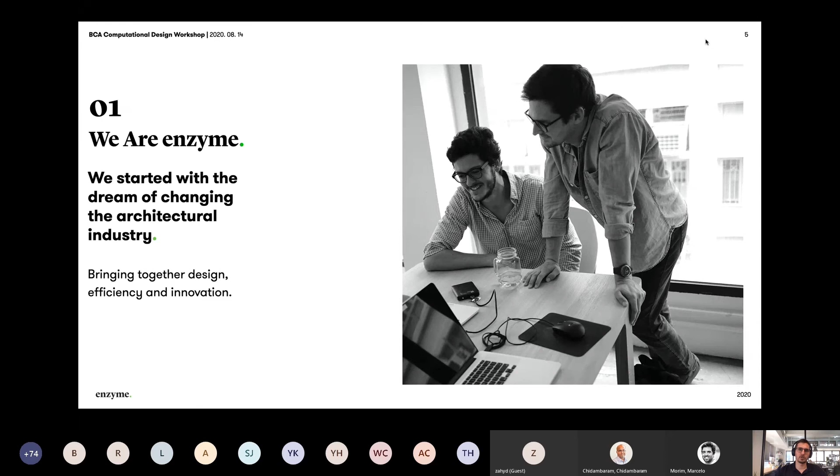So we wanted to bridge that gap. Within the company, we first focused on high-quality design, of course, but that's not enough — we've come to learn that it's not enough anymore. Many people are doing good design, so we have given ourselves the responsibility of improving and enhancing the way we work every time.

So every project becomes research, every project becomes a journey where we try to implement and expand the knowledge, the skill sets, and try to be more sustainable, not only for the environment, that's one of our key focus, but also economically sustainable, the projects for the clients and for us.

Because of that, we are all the time looking into new technologies, like BIM, computational design, real-time rendering, GIS. We keep on developing smart workflows, trying to integrate all these technologies.

So the team is actually quite small. We have offices in Hong Kong, which is the main office, and we have a small office in Madrid, because the three founders were from Madrid, and we have offices in Madrid and in Singapore as well.

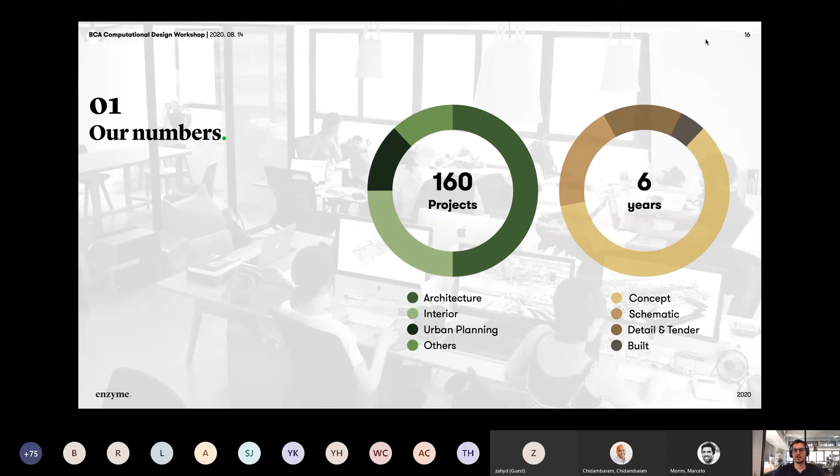So being so small and so young, we have participated and worked on more than 160 projects in the last 6 years, across various scales. So we're very proud of this.

So anyway, as I said, a few of the clients we've been working with, from developers in different parts of the world, Swire or Lotte in Asia, Emaar in the Middle East, Oliver Wyman as well. And then we have also participated and collaborated with a number of architectural and engineering firms like ADAS or Takenaka, Woods Bagot, KA in the US, PLA in Hong Kong, and Architect 61 in Singapore.

So just to move forward a little bit, I want to talk about two key things in this presentation before we start. One is the use of BIM to communicate our ideas. In terms of using BIM for design, I think this is one of the most powerful things we can do. Of course we can be efficient, we can be fast, we can be precise - that's a given, that's the BIM platform. But one of the best things about the use of BIM is to help us as designers communicate our designs and communicate ideas.

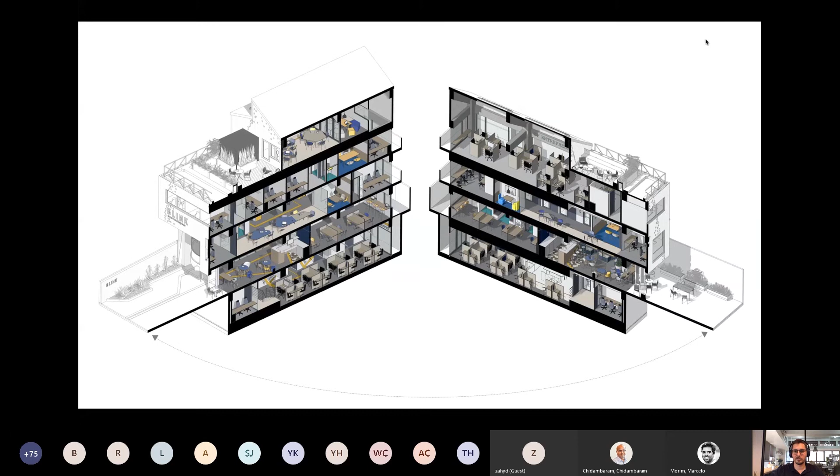Same as, for example, creating these sections - this was all created in Archicad. So 2 3D documents put together on a layout and just an arrow. So very fast and very, I think, at least for me, very visual, very impactful. Also when we're talking about just simple documentation, the fact that we're able to create these Photoshop-like drawings really helped us without having to go back and forth to many other software.

And lastly, in this part of the presentation, the Twinmotion and Unreal integration - I want to show you one of the latest projects we've been working on. It's a competition here in Asia somewhere, and we created this animation in a day with the Archicad model.

So this is all rendered in Twinmotion, is it? Exactly, this is Twinmotion. Twinmotion 2020 or the previous? This is 2020, this happened like 2 months ago. So it's not the latest version, but the previous one. It's the 2020.1, I believe. Oh, okay.

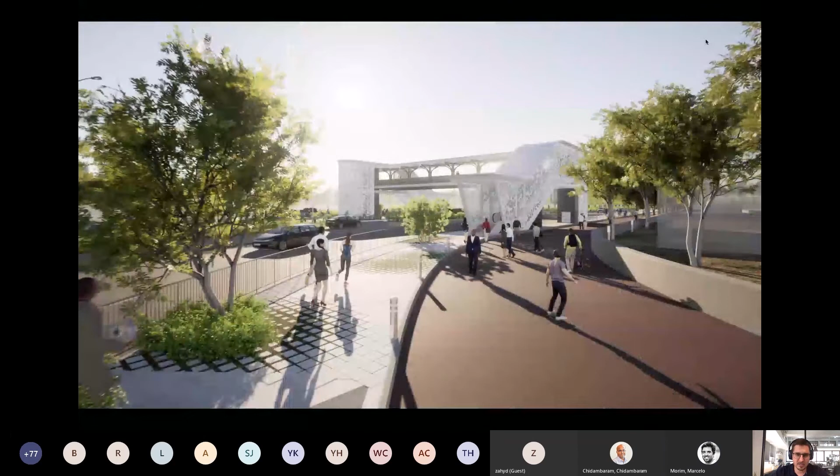That's quite impressive. And this whole project, the renders, the animation, everything was done within a week. I mean, it's not a big project, and everything was done internally in the office. So you didn't have to go hire a rendering expert? No, exactly.

So once the project was finished, after a few days, we just put it in Twinmotion and spent a day playing with materials and vegetation, etc. And one of our guys put it in Premiere to add the music and create a bit more of a professional look. But that's it. Okay, very good, well done.

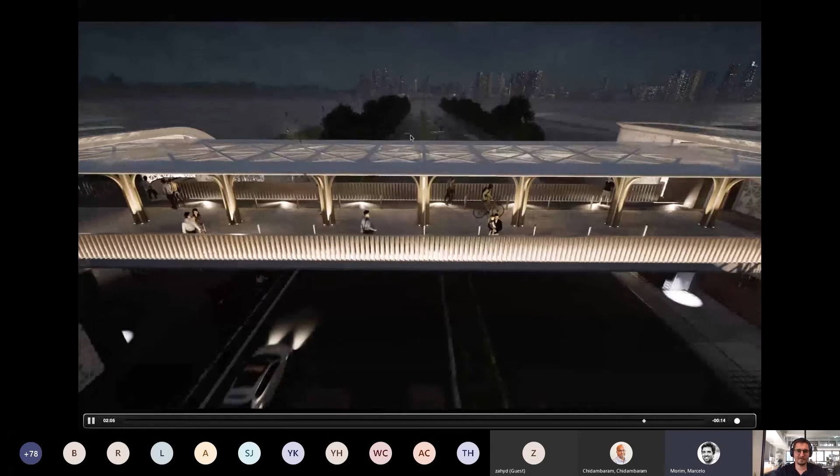I don't want to spend more time on this, but I believe this can be something really powerful for every practice. More and more, you can do the renderings yourself. I mean, we still use render companies, but only when we need very high professional quality, not for the everyday rendering jobs.

For every project we need to produce an average of 50 renders in total, because every time we're trying new designs or iterations, comments etc., people want to see how that looks. So if we have a tool that is almost free for us - free not in terms of buying the software, but free in terms that we spend very little time - then it's really worth it.

So anyway, moving into computational design, this is the second thing we love about Archicad and about the work we do. Lately there's this trend in architecture, I think for the last maybe 5 years, where we're bringing this concept of parametric thinking.

That means it also includes BIM, at least in my perspective. And this is changing the way architects, especially young architects, are designing and aligning their thinking process. It's very different from the old school way to do architecture, and I don't think one is better than the other.

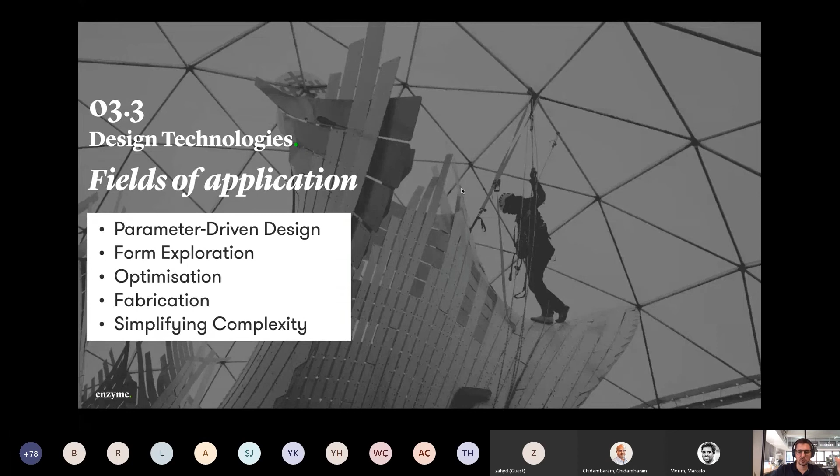Or you as a designer can decide which goals you want your design to reach, and then you can use tools like this one called Wallacei. It's an improved version of the Galapagos tool that Marcelo was showing before.

Those tools are based on evolutionary genetic algorithms, applying biological genetic theory into architecture. So practically they find the best solution in each iteration, or generation, and then combine those good solutions into a better solution, and then into the best solution.

So you can optimize for one parameter or for multiple parameters. This Wallacei tool is optimized for multi-variable solutions. It's something very interesting that we've been using lately as well.

So in terms of form exploration, something we really like about this live connection between Rhino, Grasshopper and Archicad is that you can continue. Obviously Rhino might be the best tool for this job because it has all the freedom of NURBS modeling. Now in the new Rhino version, you have subdivision modeling as well, which is really interesting. But things in Rhino, SketchUp, Blender or 3ds Max are just geometry.

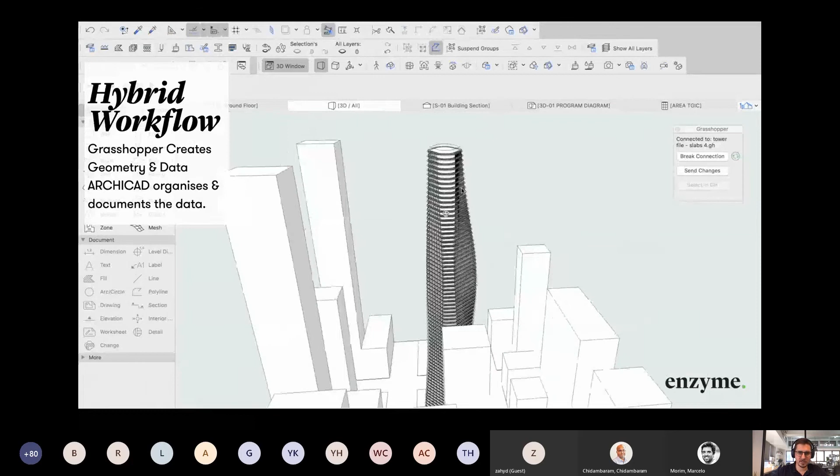Our typical workflow would start, for example, in Archicad or in Rhino, where we start playing around with very simple lines. These lines can later become, as you can see here, slabs, beams, balustrades, curtain walls, or whatever, but keeping it super simple.

Like if you notice, I'm going to just stop here. Oops, sorry, I don't know if I can stop the video, but these lines—we're playing around with an extremely light Rhino model. This line in Archicad, I like to call it double parametricity.

So the overall shape is parametric in Rhino Grasshopper, but those lines, once they enter Archicad, can be many things—walls, slabs, and beams almost at the same time—and they can also be parametric in Archicad in the sense that they can change the level of detail without changing anything.

In Archicad, they can start adding more and more detail, for example by changing a simple beam for a complex profile beam, etc. Then they can become something extremely detailed with very few lines actually modeled in Rhino Grasshopper.

In this process we use data-driven design. By creating a proper template for design, we can keep track of every iteration by using schedules, for example. We can insert properties from Rhino Grasshopper, and if we have this prepared on our template file, we can leverage the power of this information that is parametrically embedded from Rhino Grasshopper.

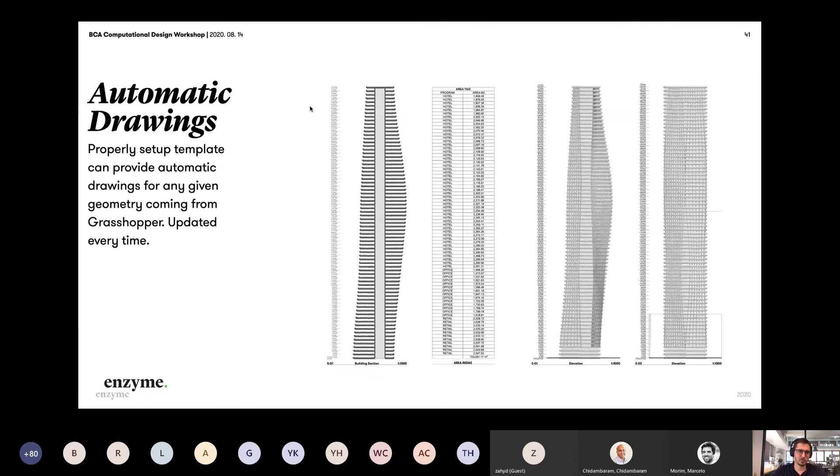And these 20 options, if the Archicad file is properly set, you can have almost like a concept design documentation package for each of these 20 options, and they are updated every time, all together. So this is really powerful for us.

Similar to, for example, 3D views, etc. This particular exercise you're seeing on screen was a model developed live in another webinar, and it happened within an hour and a half—from scratch, creating the Grasshopper model, to having this level of detail.

The most important thing is that this was not just one design, it was a family of designs. By changing the script, you could create any similar tower.

Another advantage is that by using this plugin with Rhino Grasshopper, you can bring even models developed in Archicad into Rhino Grasshopper and run analysis using Ladybug and Honeybee, or other plugins, to assess how different constructive solutions impact our design. So it's like a both-way channel.

In this case, we were trying to assess two things: an architectural language for a facade, and optimizing the number and size of sun shading devices, calculating shadows from other buildings and the sun path. This created a very particular and interesting facade language while also optimizing cost, construction, material, etc. So it's good for many things.

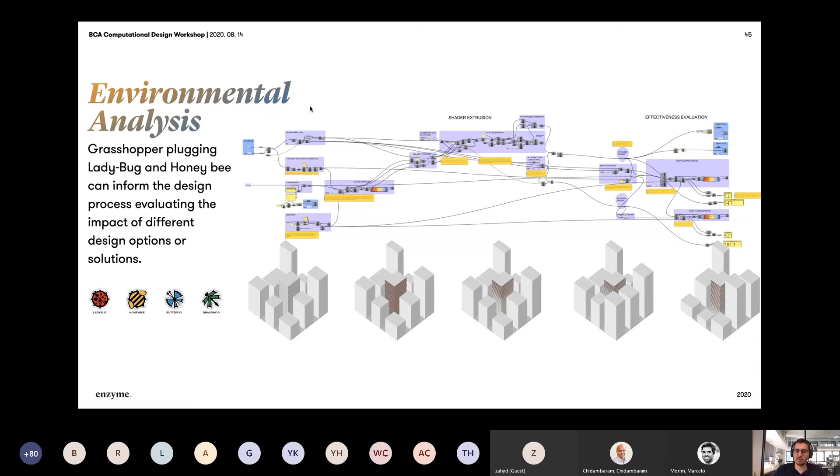I'm going to show you very quickly a few case studies. Some of them you already know, so I'll probably go a little bit fast.

This is one of the first projects we did using this connection, almost five years old. We wanted to create this fluid wave form in front of the coast, and this was very difficult to achieve in Archicad—so this is specifically when we started learning Rhino Grasshopper.

Our client was a hotel developer that had hardwired typologies of rooms with specific sizes and layouts they wanted to use. So we said no problem, just give us those layouts, and we hardcoded that into the script as our starting point.

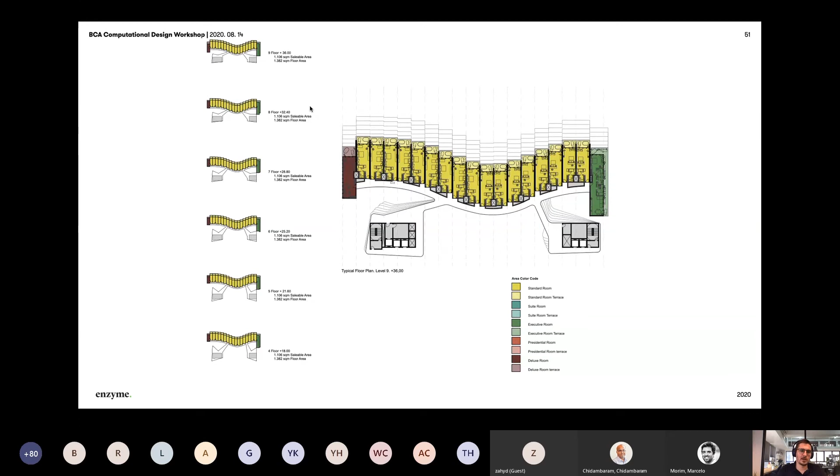By using and moving those modules, we created this interesting volume and facade. We also used Grasshopper to send everything to Archicad, where the documentation process happened—creating floor plan diagrams and area schedules for each of these options.

Then we worked on specific architectural features, like this facade using a rotated fin for the sun. You can see how there was a seamless connection from Rhino Grasshopper to Archicad—and in Archicad we don't have Rhino elements or imported or weird elements, we have proper columns and proper BIM elements.

This is a project in Malaysia, located in the middle of KL, in a beautiful jungle area near the communication tower. The terrain was very steep and quite difficult to work with.

The goal was to build a 500,000 square meter residential project, which would probably mean destroying most of the jungle and creating one of these typical typologies. So we wanted to create something different.

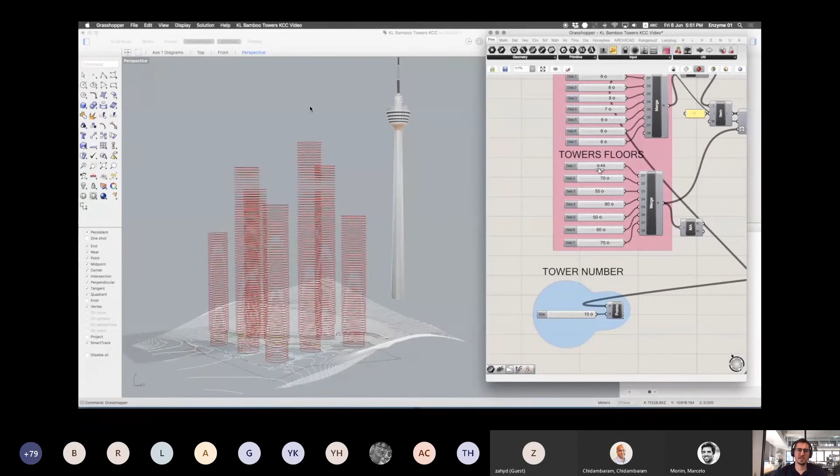We also used Grasshopper to assess different volumetric versions of the towers. The script eventually became quite large, but we ended up sending all the basic information to Archicad, where we continued development—you can see the Archicad screenshots here as well.

And in Archicad, we were able to leverage the power of this information coming from Grasshopper, creating these quick diagrams, tracking all these different types of floor plates, of rooms, apartments, etc. Then we developed a few hot link modules that then became the whole project.

As I said before, one of the best things about working with Archicad is that at any time in the project, we could just stop, create these marquee sections, and get out these beautiful 3D documents explaining areas that were not so easy to explain with floor plans and sections, especially in such a complex project. Again, very easy to explain to the clients.

And this is just the last piece of the presentation. Sorry, I'm running 5 minutes late already, but this sort of engages with the next part. It was very interesting, so yeah, okay.

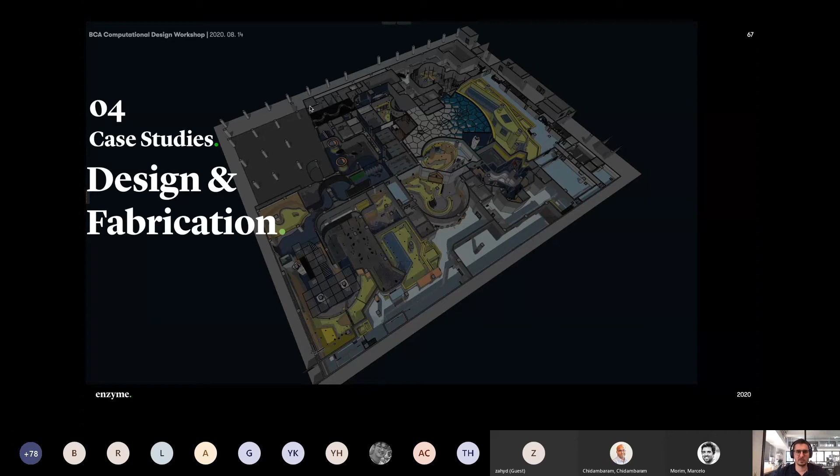The only good thing is that this part will engage with the exercise, so I think we have time. This is one of the latest projects we've been working on, quite a complex BIM model. I cannot reveal much about the project, but it's an aquarium.

So it has a lot of different components, from architectural or structural to very specific traits, like the aquarium specialists who have a lot of weight in the whole decision process. We're doing the architectural and interior design works for this project, as well as carrying the BIM model, acting as the hub where every other consultant plugs in their models, etc.

So in the interior design scope, we had to create a few design items that required this computational design approach. One of these items are the columns.

Because this aquarium is not a standalone building but is inside another building, we had the problem of having a lot of columns in the ground floor, lower ground floor of this building, all throughout the plan, and we couldn't avoid them. So sometimes they were quite annoying, and we decided that for certain parts where the columns were exposed, we wanted to make them disappear.

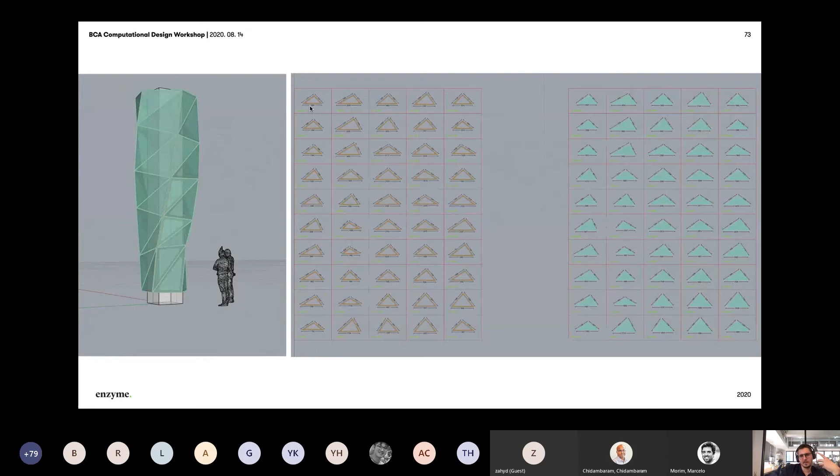So we designed this column - the main column came from Archicad. You can see here the wireframe model coming from Archicad. Then we designed the yellow part in Rhino Grasshopper, documented it in Rhino Grasshopper, and then sent the model back into Archicad for spatial coordination. You can see here Rhino Grasshopper and Archicad, where we placed all these schedules in the layout together with the rest of the package.

The columns were also important for creating all the internal elevations, etc. So this is one of the items, quite simple. In the same space, we had this very large area where there was nothing, and the client asked us to do something for that area that was in line with the rest of the space.

Being part of an ecosystem of rainforest, etc., we proposed this idea of having almost like this swarm of fireflies or butterflies that the client liked. By the way, this is the exercise that we will be replicating just after this.

So we went into Rhino Grasshopper because we had in mind what we wanted, but we had a number of items in the room, like the columns, and another condition was that the space was going from one floor down, because it's the same space. We were coming from an upper floor, and then suddenly the space dropped one more floor down, so it was like expanding.

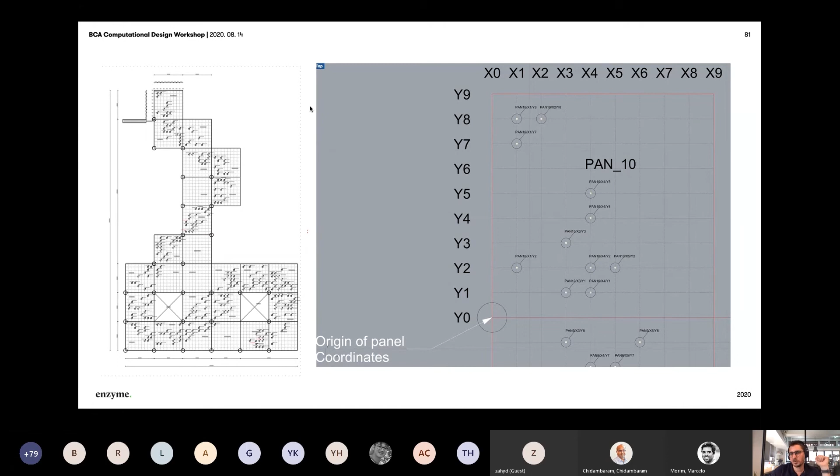Carlo is going to show us how to optimize that using Python and Archicad. This is how it looked, the detailed model in Archicad with all these grids as well. We needed to later create a schedule to have each of these lights and understand the length of each element, in which location, in which panel, and in which X and Y coordinate for each panel. So we created this schedule very quickly once all the information was coming from Grasshopper.

And you can see here a few images. I think I'm going to jump this one, so we can just jump right into the project. If you allow me, I'm going to quickly run through it, but I don't want to spend much time. This is another feature of the project, but this is quite complex, it was a complex area.

We decided to create this Voronoi ceiling, and we did a quite complex Voronoi script. This was successful for the design submission. You can see here some images of this idea, but for the design submission, we had this quite randomized. We didn't really think through the Voronoi, it's like a random system, something very natural, very fluid, very randomized. So we didn't think it through.

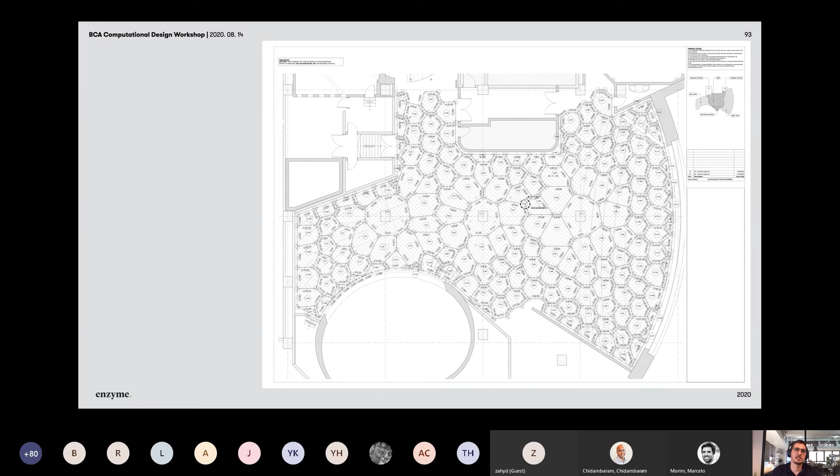I think, in my opinion at least, even the aesthetics of the final result, the final ceiling, have improved a lot. You can see here in detail what the first approach was, and then the final solved approach.

This is one of these images from this genetic algorithm tool called Wallacei. If you haven't looked at it, just go check the website they have. It's a free tool, so it's really incredible.

These are a few images of the process, and by the end of the submission we also played around with GDL, custom GDL objects that we placed in Rhino Grasshopper. The objects were created in Archicad, simple objects like circular plates, as well as the hangers, and we placed all these elements automatically from Grasshopper, choosing the length.

They were modular, so there were large hangers and smaller hangers, because all the panels have different heights. We were able to create different groups of heights to use these different modules and then place them automatically into Archicad. Once in Archicad, we were able to create schedules and know exactly how many of each of these elements were used. So anyway, thank you so much.

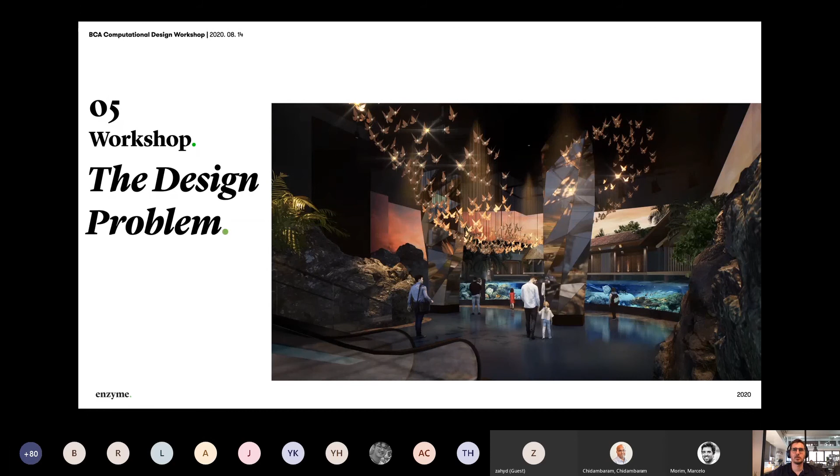Okay, so I just want to introduce you to the design problem. You can see on the screen one of the images of the space as it was designed. We started with these very sketchy ideas and references that the client loved, and obviously this is something that is quite difficult to do in Archicad.

At the moment of the concept design phase, we had developed the model in Archicad, so you can see on the right side of the screen this sketch render showing all these butterflies. That was coming from an Archicad model, very simple. Obviously the butterflies were a Photoshop added effect, something quick like a sketch to express the idea. The client fell in love with this, and that was the direction for development.

We obviously had to find a way to create, and not only create but also control, because this is an item that's going to be built and fabricated. So we needed to be very conscious about the number of items, the construction system, etc.

This is the space. You can see the space is coming down from an upper floor to this kind of two-story or double height lobby, and we have those columns there in the middle. So what we wanted to do is create this path.

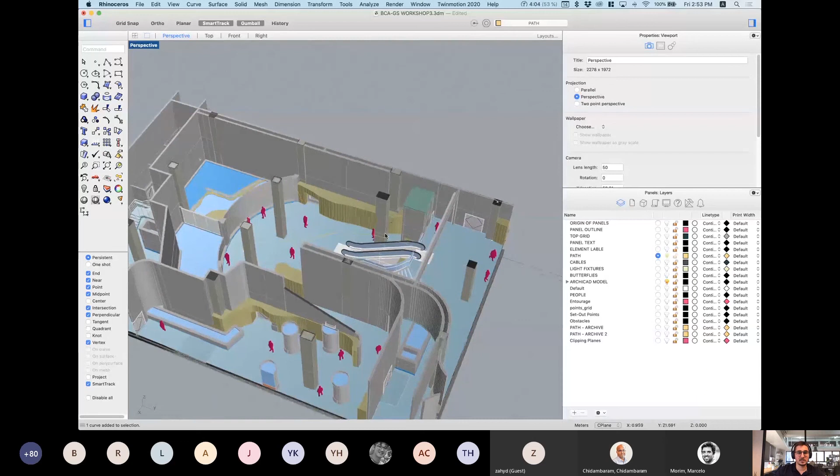So let me jump into Rhino and start with the Rhino screen. This is the Archicad Rhino model, the piece of model that was saved from Archicad. You can see it's coming in as a block, but we can explode it if we need to. I'm not going to, because I don't need to modify the model, but it's quite detailed and quite clean. If there's any Rhino user in the webinar, you'll see that the geometries exported are very clean.

So having this model as the environment, the only thing we did is create this 3D path. How to do it? It was quite simple, but let me repeat it.

We use this command here, the NURBS curve. By using it on the plan, what I did is just add control points, and we can create a different curve.

Then with this curve, we can go into the perspective mode. For now, you can see this is placed in the XY plane. The only thing you need to do is locate it into the right plane and start playing around with the control points, moving them up and down as you need.

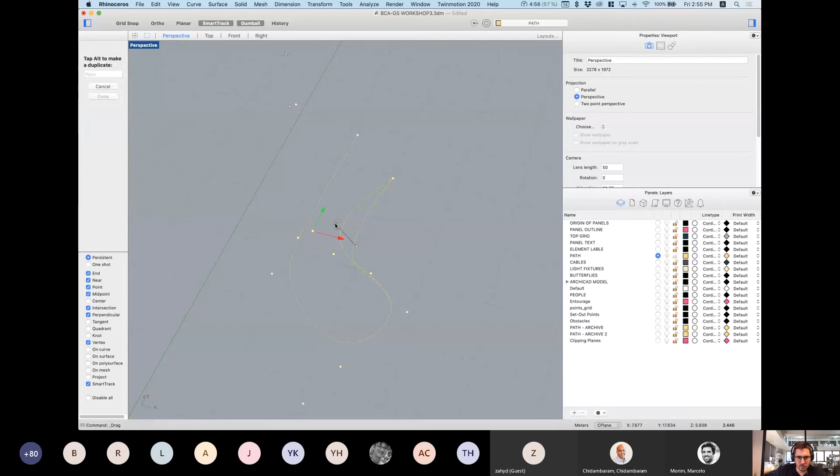This is the way I created this path. Let's hide this for now, and you'll see how easy it is to edit these points. We can play around, and if we don't want certain points, we can delete some of them to create a more natural curvature. It's very easy in Rhino to play with this element.

Once we have this in Rhino, we can compare it to the model and understand how we're doing in terms of height. For example, we can see here that we are inside the curve.

We can use this little tool, the gumball. You can move the arrows to move in X, Y, or Z, and also use these little planes here that will move in the XY plane, or if we rotate a bit, also in the X, Y, or Z plane.

Okay, so Jorge, this will help. Just a quick one - could you make the line another color? It's really hard to see. No problem, no problem, no problem.

Let me go to the path line and do it right, and I'm going to just get these other elements out. Okay, so I think now it should be easier to see.

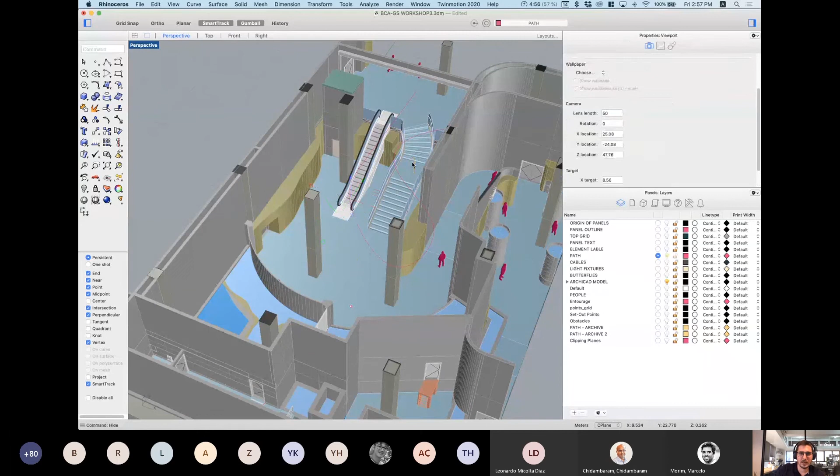Not really sure how to make it better. I have to say I'm not a very good Rhino user, so if there are Rhino users in the room, please don't laugh, because I'm only an amateur. I'm not sure if you can see better now - perhaps I can use the Arctic view.

Okay, so you can see now how the line is doing. As I said, we can refine the design of this line.

Once we have this, let me go back to the wireframe because that can be quite heavy. I'll get this panel out and open Grasshopper - just type Grasshopper here in the command bar. This is the script that I developed for the exercise.

I've simplified it quite a bit for this exercise, so most of the things related to fabrication have been deleted just for clarity. But we will explain those processes in a later webinar.

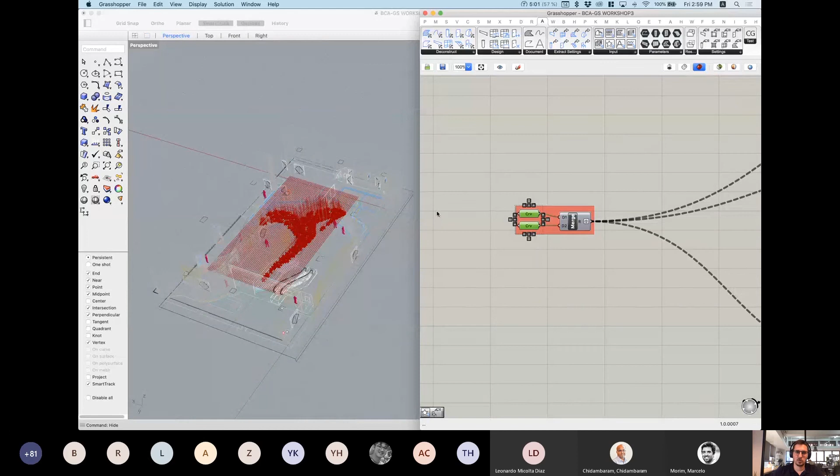So the script starts with the input of the lines. Let me hide this, and we can use it later. We have these two curves in here. I'm using a mode in Rhino Grasshopper that can hide - this one will show all the geometry we've created in Grasshopper. If we click this button, it will only show whatever is selected, which is very useful for debugging or to show only certain parts.

So we started with these two lines. This will create the path that we want the lines to follow, and I'm merging them together in order to have just a group of these two lines to work together.

You can see that the script goes in three different directions. The first one is this one here.

I am dividing the curves at a 1.5 distance, and I'm doing that because I want to find the perpendicular vector, the normal vector to the curve. Why this? Because what I want to do, let me explain it quickly here, I want to create an offset to these curves.

An offset, but I want this offset to be natural. I don't want it to be a strict, perfect 0.5 offset. I want this offset to be a little bit fluid.

So what I'm doing is finding this vector that is perpendicular to the curves by using this frame, the horizontal frames. That is giving us, you can see, a bunch of planes at each of these points.

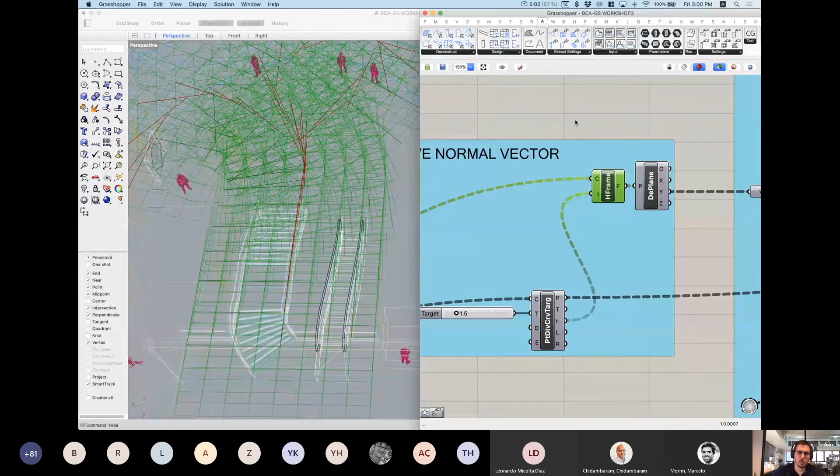Wherever there is a point, it's creating a frame that is in the XY plane. This frame is aligned to the curve. So what I'm doing with these frames, let me just get one of these frames to see it.

This frame has these two vectors, right? A frame is a plane, it's just another way to call a plane. So we have the X and we have the Y vector.

And this Y vector happens to be the direction that I want to use. You can see that this Y vector is perpendicular to both curves, because I have two curves, I have two planes, right? So what I'm doing is using that vector.

So I want to find that vector. In order to do that, I have to take these planes and deconstruct them. So you can just type deconstruct plane.

And I'm using this technique, which is just double clicking on the canvas and typing. So, deconstruct plane. By the way, if you don't know the name of the specific node that you need, you can just find them in the bar on top, it's quite straightforward.

So you have vectors, in this vector tab here you have everything that is related to vectors, so planes and grids and vectors itself, curves for everything related to curves, surfaces. So it's quite straightforward.

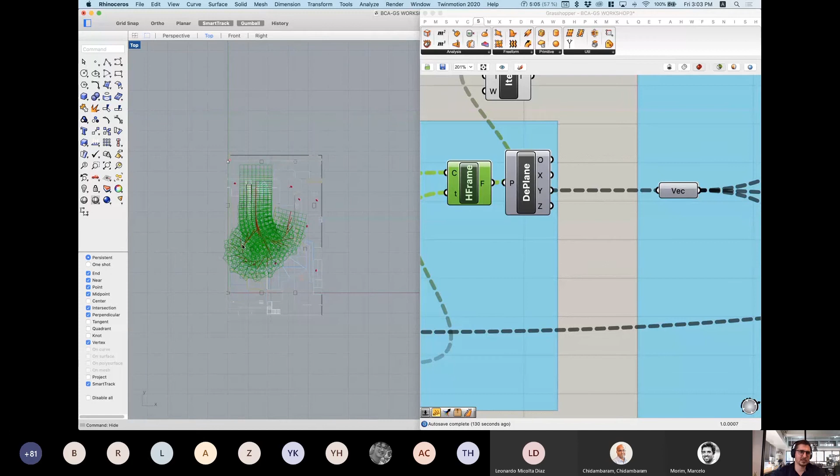It's very simple. If you go to the top view, you can see this little icon here on the bottom where you have Y and X, and then you have these two colors, green and red. Red is X and green is Y. So that's how I figured out which one I need.

So I took the Y and I just put it into a vector node, an empty parameter vector, just to keep it here. So this whole piece of code here looks very complicated, but actually it's not so complicated.

It's just a repetition of this module here several times. Actually, this one here. So what I'm doing with this, I'm taking this vector here, and I'm using this function that is called the graph mapper.

What the graph mapper is going to do is create a series of numbers from one number to the next, and it's going to create a series of numbers within that range. Let me explain with a practical example.

So I want to move, let me show you this. Let me show you this curve here, and let me show you the original curve. So, let's go to the top. What I want to do, I'm going to just delete this curve here, and we're going to play with only one curve. It's quite more comprehensive.

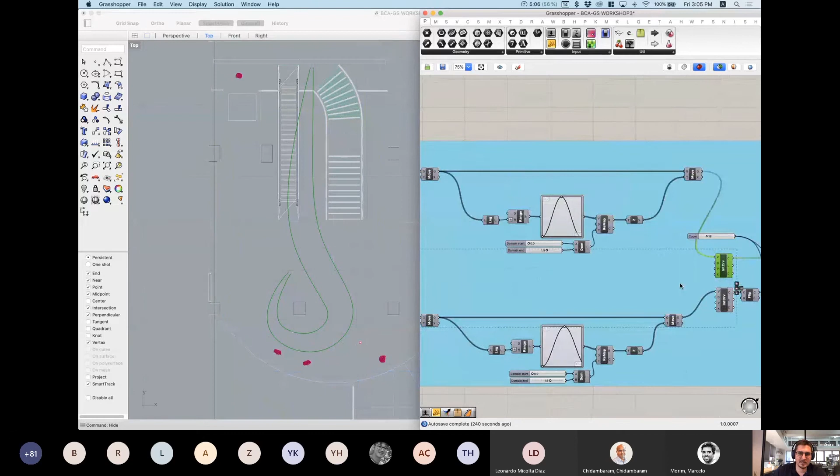So you see that I am moving all these points, all the points that I had before in my curve. I'm moving them by a number, creating this offset that is not constant, but it has this shape. So what I'm moving these points from is 0.2, so the minimum here is 0.2, and the maximum is 3 meters.

So this is 0.2, and this is 3 meters here. This represents the length of the curve in this direction. And what I'm doing is dividing this edge here by the number of vectors that I have, so I have 22 values. What I'm doing with this is called list length, which gives me the number of elements in a list, 22.

So I'm creating a range that is from 0 to 1, but divided by 21. I'm doing a little subtraction here using this expression editor, just subtracting one value. Why is that? Because if I want to have 22 numbers, I need to divide by 21 divisions, since I'll have the first and the last plus the 21 divisions. That will give me 22. So I'm creating this range.

So this is the length of the curve, and these are these values, 0.2 and 3. Actually it's 0 to 1, but I'm remapping the values into a new domain that is this height. This gives me just a bunch of numbers.

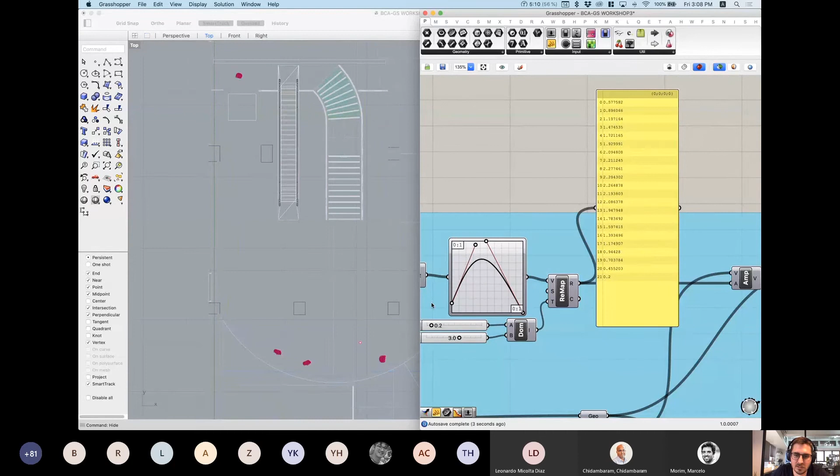Okay, this is one of the most difficult parts, guys, bear with me. Once we have these numbers, what I'm using them for is to create a vector. This is called amplitude. It will take any given vector and give that vector a value of amplitude. This is exactly what I need, because what I need is to have these vectors that are going to move my points.

They need to have specifically this proportion. So I'm taking the vector that I calculated first. If you remember, this y vector, when you see these vec parameters, I'm just using these empty parameters to organize the script, moving the same information from one to the other.

So I'm taking this vector and applying to it a value of amplitude. So these vectors now have a module equal to this number, and I'm moving these points specifically to that distance. You can see that.

So after moving these points, I'm also applying a movement in the y direction, and now I'm applying a movement that's exactly parallel in terms of height, but it has this almost sinuous movement. In terms of height though, it's exactly the same heights. What I want to do is move it as well in the z value.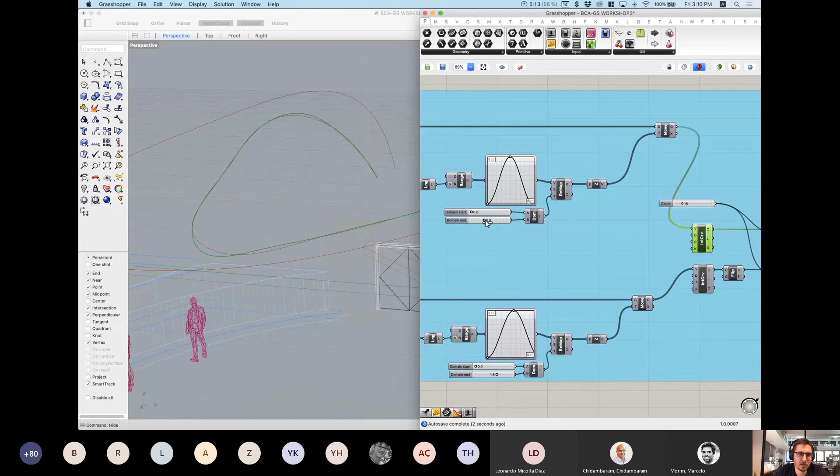So now it won't be any more similar in height as the other, but I'm also deforming the height of this.

Okay, I don't want to go too crazy because this might later on affect things, but this is the idea. I'm doing this not only on one side, but on both sides. So I'm taking the points, moving them here, then moving them up and down, and then taking the same points, moving them to the other direction, and moving them up and down.

So this one here moves the point in one direction, this one here in the other direction. You can see it here, on both sides, and then these guys are going up and down. So it's very simple, just very repetitive. It looks quite complex, but it's very simple.

Once I have the two curves, I just join them to get lines created on both ends. How did I do that? I just use a component called endpoints that gives me these points on the end, then just connect them with a line, and join them together.

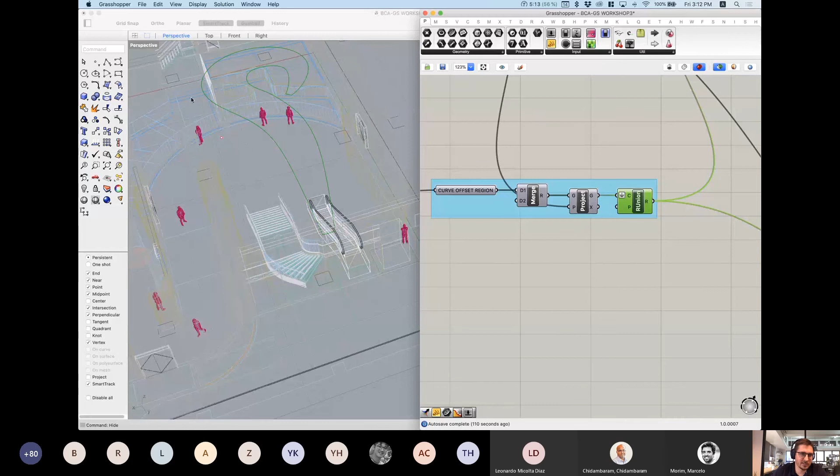Not anymore. So I have the area that I want to create the scatter of points. This area obviously depends on my line.

If I go and show the line, the original line, I'm going to just show selected. I just want to select this line here. If I move this line now, everything should adapt accordingly. So if I move the original line a little bit, I'm not sure if it's visible enough, but the script should... let me just set one curve. This one here, okay. You see now, it was not connected, but if I move the line, the script will create this accordingly. So everything now is connected to that original line.

Cool, so this is like the first part of the script. We're halfway through. The second part that I'm going to start is to create a grid. Why do I want to create a grid?

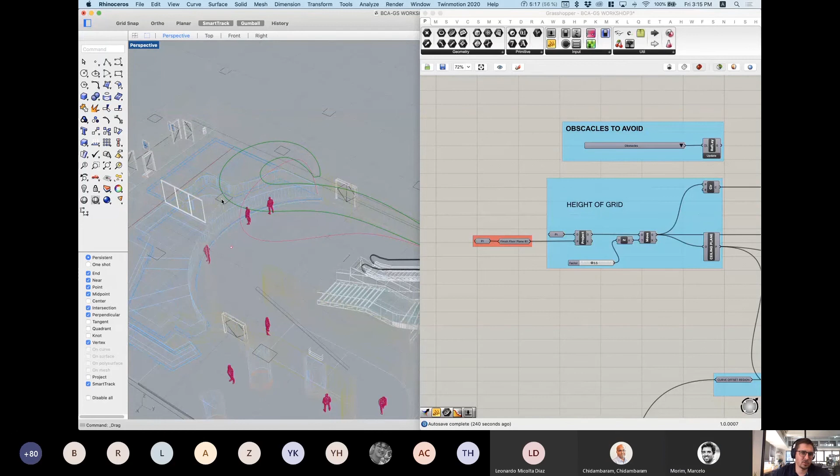So, in order to create the grid, you will see some elements here that actually I'm not using anymore because they were important for the fabrication part. But don't worry, I will explain this in the next webinar.

Okay, so we're going to start with this point. This point is giving me, you can see it here, the height of the floor finish of this element. I could also have brought this from Archicad. I didn't do it that way, but we could have as well brought the story from Archicad.

I'm going to use story plane. Story plane will give you the story settings, so it will give you a plane.

So let's cross fingers and connect Archicad. Bear with me if something goes wrong, because streaming all this just makes the connection a little bit more unstable. Yeah, it uses a lot of the graphics card. Yeah, so I'm going to try.

So what I'm going to do now is read the Archicad story planes. I could say, okay, I just want to have my B1 - that's the name of the story - and that's what's giving me. I'm going to connect this into a plane.

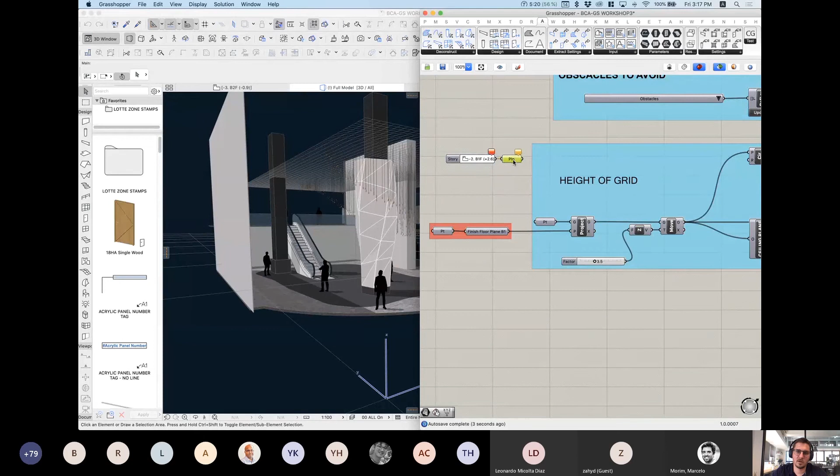Okay, I'm gonna show you in a different way, but the idea is that this will give you a plane. This plane we can just use for now, it's not connected anymore, but you see now it works well. This plane will be similar to this other workflow that I use.

So the workflow I use is to find a point here, and you project this point into... this point here, excuse me, is my set out point, okay? So what I'm doing is moving that point into the right location.

You can see here, so this will be the plane where all my ceiling will be, and it's 3.5 meters from this finished floor plane B1. I can control this parametrically as well. I had it at 3.5 for a reason, actually to avoid the MEP, but if we need to move it, I can move it from here.

And I'm just creating a circle there so I can see it better. And from this point here, I want to create a grid of 1.5 meters, so I'm creating this grid here.

This grid is based on, okay, so I have this region here, and this point, both points are giving me this region, this box. It's called a bounding box.

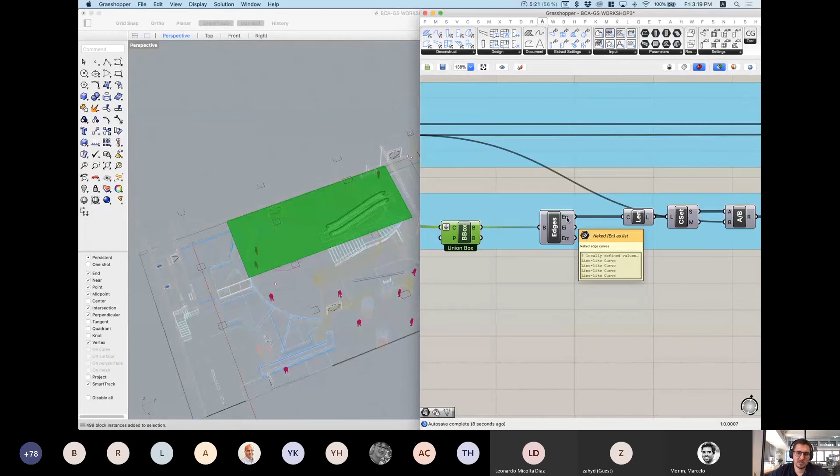And what I'm doing now is measuring these two sides of the box. So I want to know what is the length of these two sides. I'm connecting this to an edge component, Brep edge, and that gives me the naked edges. Naked means the external edges, edges that are not connected to anything else. In this case I have 4, so these 4.

I'm taking these 4 lines and measuring the length, using this component called length, which will measure the length of a curve. So I have these 4 values here. You can see if I add a panel here, you will see these 4 values.

But actually, and it makes sense, they are the same 2 to 2. So these 2 are the same, these 2 are the same. So I only need 2.

So I'm connecting this component called set, create set, and this create set component is very interesting. It scans through the list of numbers and gives you the elements that are unique. It gives you the elements that are unique on a list and the location of these elements, you can see here.

So it's telling you there is one element that the component calls 0, that is 8.7, and you see that 0 is located in these 2 points, here and here. And the other component, 1, is in this position. If we had 3 that are the same, we would have 0, 0, 1, 2, etc.

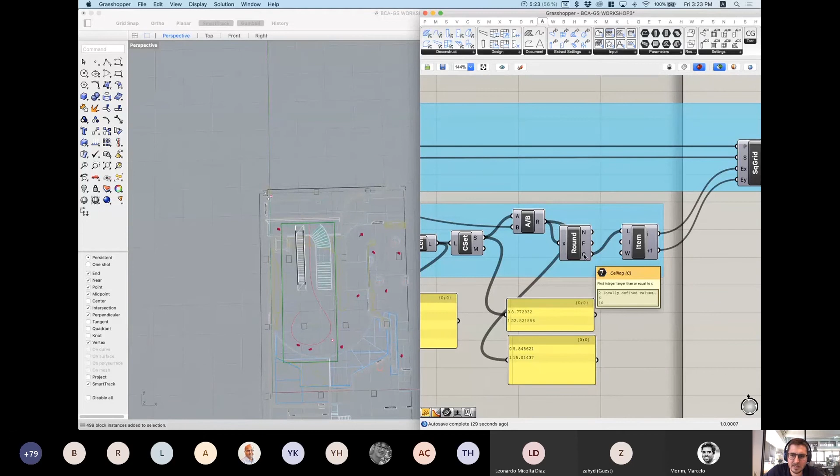One is 16 and the other one is 6. So I'm gonna have 6 panels of 1.5 and 16 panels of 1.5, okay? This is my grid, this is my module, okay? This will be important later on for fabrication, okay?

What I'm doing now here is taking this grid. This grid is giving me a lot of squares, okay? It's giving me exactly 96 squares. I don't want, at this point, all these squares. I just want to make sure that this is modular. So I'm joining together the box, and I am subdividing this surface, okay?

Subdividing by a number. So 49 and 99. Why is this? Because I want to have 100 points by 50 points, okay? So I'm dividing by one less, similar to what we did before, okay?

I could have related this as well to the module, but this was way faster, and I can also control this with a slider if I want. So I can create a slider from 0 to 100 and then go to 99 and connect. So this will also work, okay?

You can see how if I go lower, then you will see less and less division. So this could be parametric as well, okay? At the moment, because I know I don't want to move it, I'm gonna just keep it with a panel, okay? So now I have all my points here.

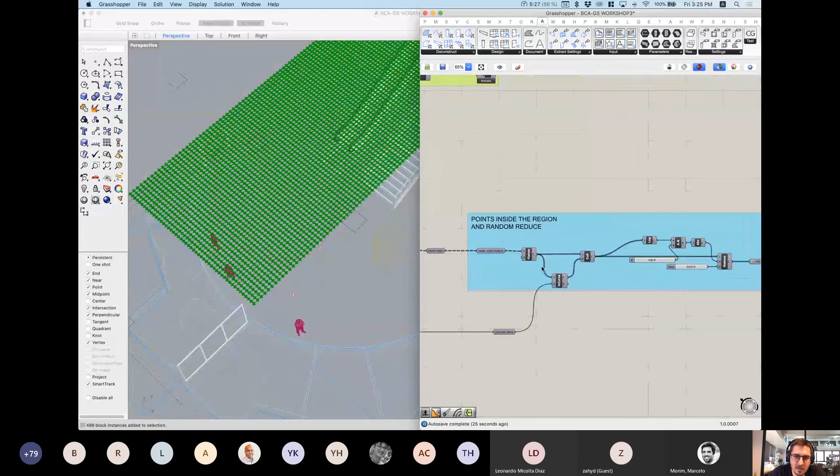They are all together. There are a bunch of points, and what I need to do, I need to do two things with these points, okay? The first thing I need to do is I need to use them to find the ones that are inside my area. This is the first thing. So this is why this is branching out, okay?

The other thing that I need to do, and this will be very important for Carlo later, I need to create a grid, okay? I need this grid of lines. And this is gonna be important later on for labeling and to create an ID system, okay? So how I do this is very simple.

I have this subdivision here of points, and this is giving me 5,000 points divided in 100 values, okay? I don't understand that very well, but I can use this component called point list, okay? And this point list, what it's giving me is, let me make this number larger so you can see.

Oops, too large. 1 perhaps, too much, 0.5 maybe, 0.3. Sorry, because this is the size of the number, okay? So you can see it's even too large, but you can see what is the division.

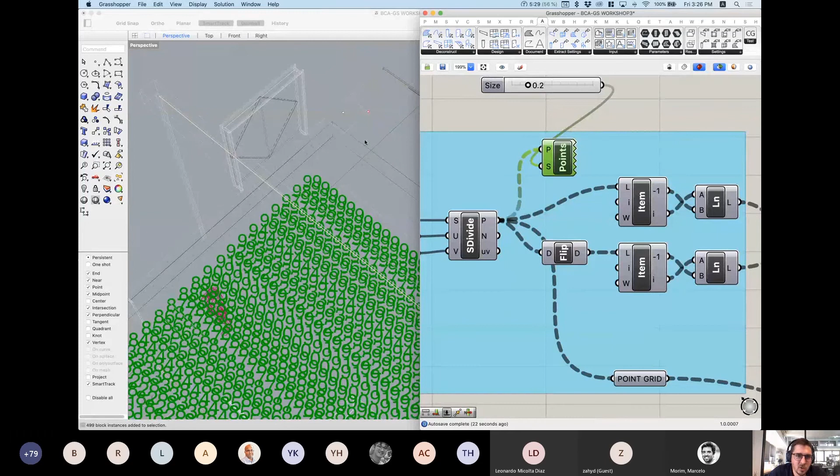So you see that all these numbers here go from 0 to, if I go to the other side, they will be 99, okay? From 0 to 99, those are 100 points, okay? Because 0 counts as well. So what I'm learning about this is that this component is grouping the points in these lines here, right?

In these vertical lines, okay? So something that I have learned is that if I take the first and the last point of these lines, I'm going to be able to create a single line, okay? And this is what I did here.

I am selecting using this component that is called list item, okay? You can just type list item. This list item will take any list, okay? And by default, it has a hardscripted number 0. So by default, it's gonna take the first element in a list, okay?

In this case, we have several lists. We have 50 lists. So each of these lines is considered a list, okay? If I look here at the information, we can see that we have 50, okay? You see like all the groups go from the top to the bottom, from 0 to 49. Each of the lists have a number of 100 elements. So each of these guys are one list.

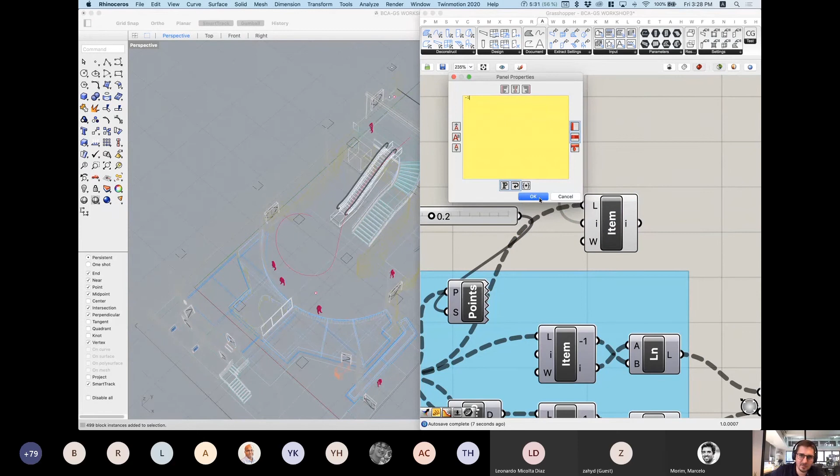So by taking this item and having here the number 0, okay, I have a panel and I just type 0. By having 0, this will be the item that I choose. If I have -1, okay, and this is tricky, but it's a notation that repeats everywhere in Grasshopper, -1 will refer to the last item.

So imagine this list to be a circle. If you start from the beginning, you will be 1, 2, 3, 4, 5 until 100. But if you start from the opposite direction, your last item will be the -1.

Okay, so this is the notation that we use in list management and list operations. If I type here -1 and also 0, nothing happens, because I need to make this a multi-line data, otherwise it doesn't know there are more than one element. So now I have 2, and this component is able to select both of them at the same time.

Also, alternatively, I can do one more thing. Let me just keep that there. What I can do is disconnect this from here, go here, disconnect. What I can do is keep the 0 here.

And if I go closer, I will find this element. If I click in here, it will add 1 in that direction. So I have the element that I want, that at this point is the first one, and +1. Now I have the first and the second.

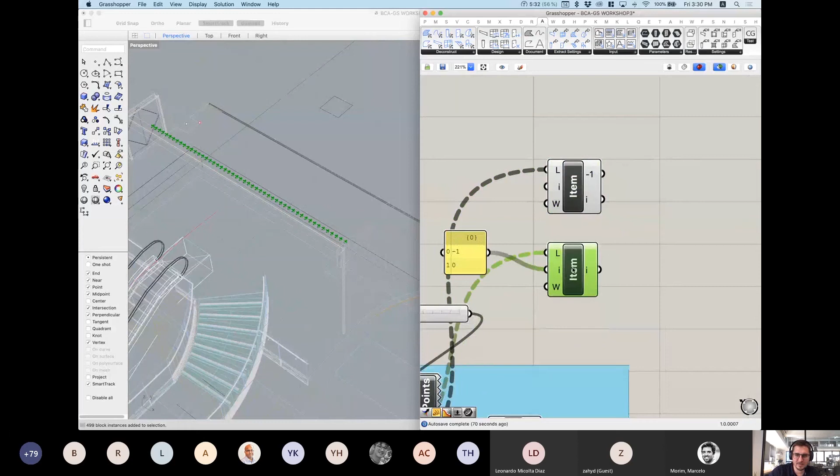Okay, and this is what I have here. Let me just disable these components. So by having these elements, I can just do a line. This is a component called line. I just type line here, and it will ask me for a start point and an end point.

So this is what I'm doing. Starting point is the 0, just to keep some consistency as well. So 0 goes to A, -1 goes to B, and I have all these grids here. I need to do the other one, and this is just one step more.

So what I need to do here, I have these 50 groups of 100 elements. This in algebra is called a matrix, like the movie, the Matrix. So this matrix of elements, you have to imagine them as in a grid, like a square grid, where you can divide these.

Just like a very simple matrix will be this one. This will be 2 groups of 3, or three groups of 2, depending on how you're looking at this matrix.

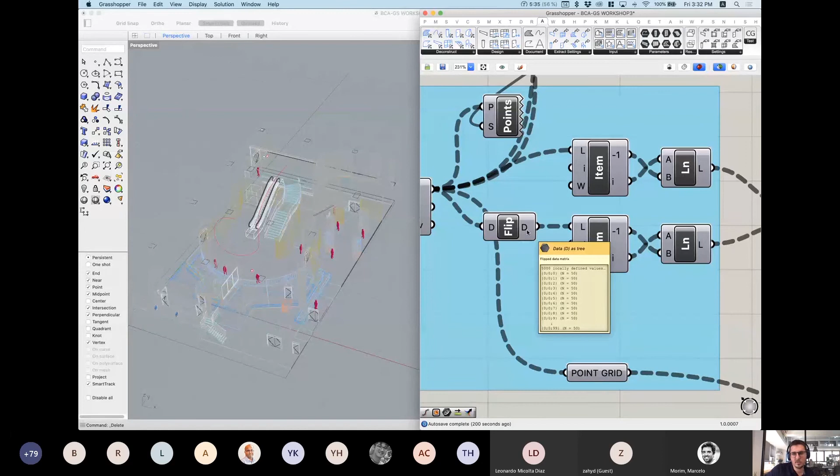So the operation we are using on this matrix is flipping. By flipping this matrix, what I'm doing is taking all the columns, and the columns will become the rows and vice versa. So by using this flip matrix, you can just type flip and find this flip matrix, and this one will rotate the structure of the information, and it will give you 100 groups of 50 elements. And that is exactly what we need.

Because if I do the same thing, I choose the first and the last, I will see that that's happening in the other direction. I do exactly the same, right? And I'm just merging these two using this merge component. So I have both the vertical and the horizontal in the same group.

And this is, I'm just sending this to Archicad, okay. And this is the simplest thing. I'm sending this as a morph, okay. I will do all the sending later on. But just to explain a little bit the setting, I'm using the morph.

I'm using the morph curve, not the morph solid. And I'm just attaching to the morph the curves in 3D. And I'm using the morph setting material that you can find here, in the morph settings, this one here. And what I'm doing is just adding a building material and a layer.

As Marcelo explained before, you could also create a favorite for these morphs and just attach the favorite, which would be very convenient because it's only one component.

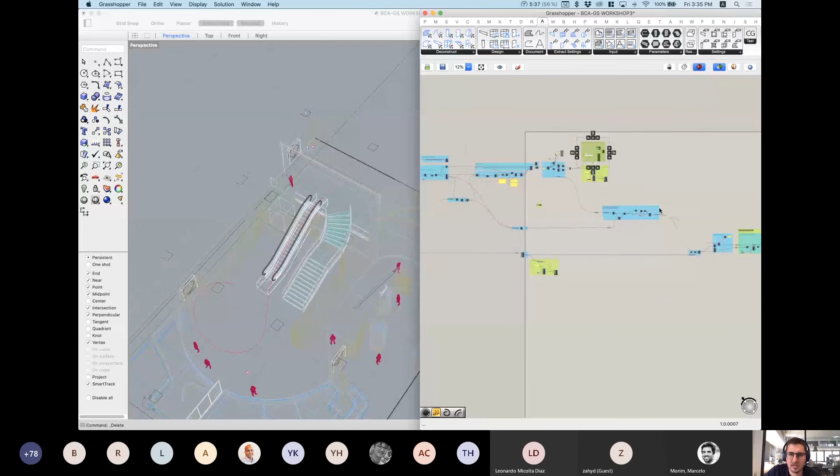All this part here, okay, this is the Elefront baking system. This is very similar to what Archicad does, if you look at it, it actually looks very similar. What it does is it just bakes this information into Rhino with some properties, so you can add a name, you can add some information. I'm not using any information, but I'm just creating a new layer, adding a color. So it's actually very, very similar to how Archicad works.

And what this does is I can have the latest, the most updated geometry in Rhino as well. And if I want, I can add some user attribute information here. I'll explain this in the fabrication part, because it's very, very important there. But for now, for the design part, it's not so important. I just have it here because at any point when I do any modification, I like to have it. I just click on activate, and that will overwrite the old geometry, so it changes the geometry in Rhino as well. So it's similar to what Archicad does, okay?

Anyway, so we can check as well in Rhino. I can just get the top grid and show it, okay? You see? Actually, it seems that I have two sets of grids.

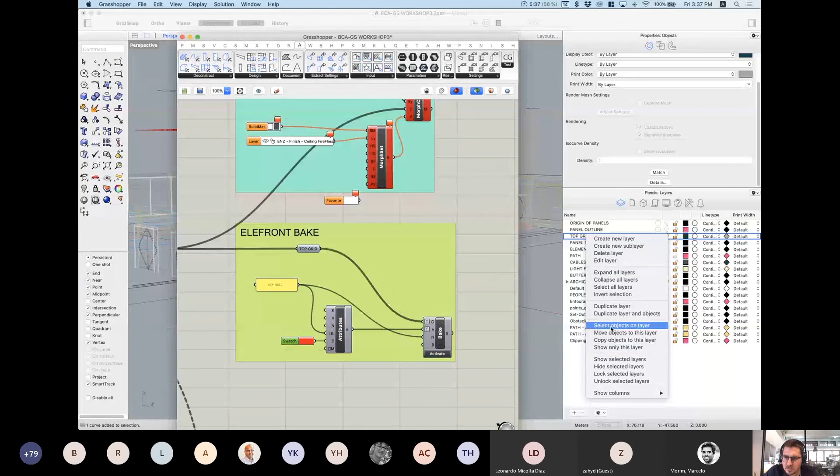So let me just come here for 1 second. Just select everything in the layer, delete those elements. Okay, delete those elements, and I can just simply come here, activate again, and now I have it. I think I deleted the swatch button, so you can just color your elements if you want as well, so I'm just going to bring a color. This is similar to the building material thing, if you like, but for Rhino. And now you see that I have changed the element in Rhino.

If I wanted to create a different geometry, like a different modulation, I'll be able to just do it and click on activate, and it will remove whatever is not necessary and replace the geometry, okay? It's very, very similar to Archicad. Okay, so we have that. This was very, very important.

Now what we want to do is, okay, so we have our curves here, okay? So we're kind of going back in time. And what I want to do is project those curves into this surface here.

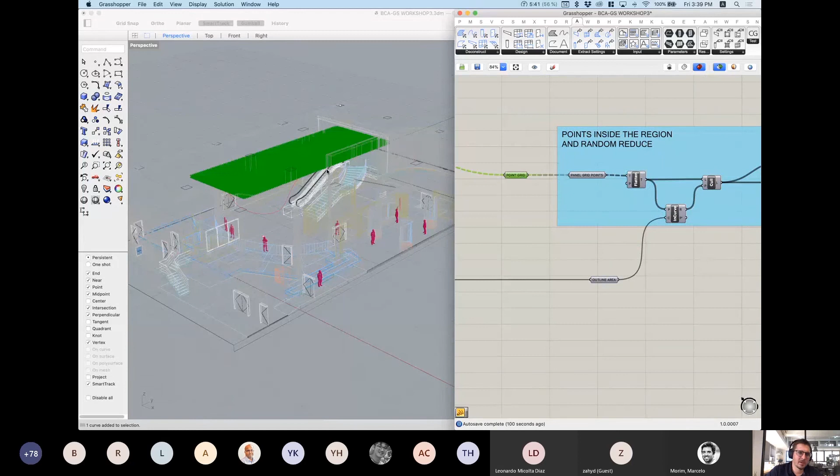So sorry, I'm just projecting this to be sure that I am in the right plane. Okay, precaution. And then what I'm doing is I have the grid of points that we had before. Okay, this is the same. Actually, this is redundant, I don't need this one. And what I'm doing is, you see that I still have the structure that we discussed before, this matrix structure inside the points, and I don't need this anymore.

So I'm going to use a component here called flatten. Okay, this part of Grasshopper is probably the most difficult. So if you look at the structure of points from here, okay, actually let me use this data viewer. This data viewer is going to help me visualize the data. So here you can see that in this component, I have these 50 branches of information with 100 elements.

When I use the flatten, or when I right click and flatten here, it's the same thing. When I use the flatten, what I do, okay, is I break all that structure of information and it just collapses all the data into one list of 5,000 elements. So here we have like groups of 100 elements. If you remember, they were grouped in these lines. And by flattening them, I don't have this structure anymore. The points are the same, but they are not organized in any way, okay?

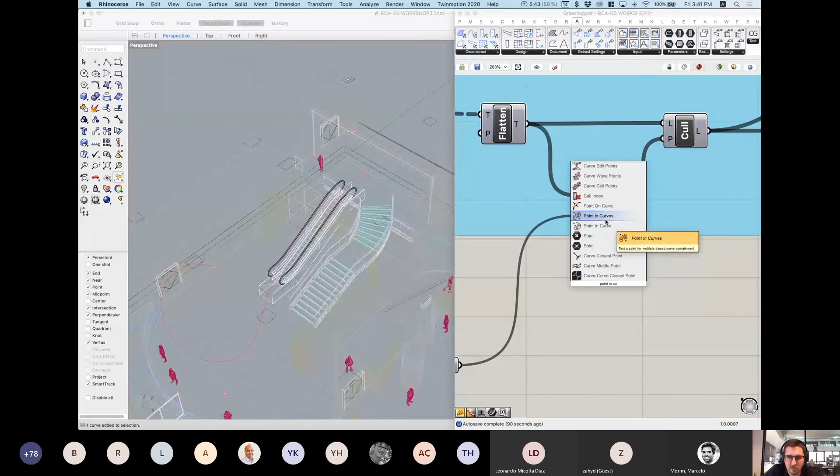So I have one curve. I can just come here, this is in the curve tab, in the analysis area, and this is point in curve there. So what I'm connecting here is very simple: I have the list of points and the curve. It's very simple, and that is giving me this result.

It's giving me zeros, ones, or twos. What does it mean? If you hover your mouse here, you can see under the relationship name it has point region relationship. 0 means outside, 1 means coincident, and 2 means inside.

So I'm looking for all the points that have either 1 or 2 relationship. I'm going to use this component that is called, sorry, cull pattern, and this cull component is going to eliminate this cull pattern.

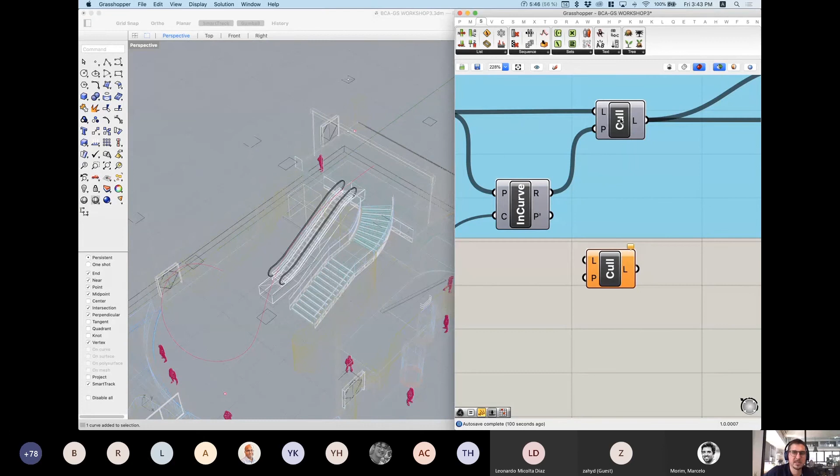Everything that is 0 in here is going to be culled, which means eliminated, removed. So here I am connecting the list of points, and here I am connecting the relationship. So all these 0s, 1s, and 2s - everything that is either 1 or 2 means that it's either inside or on top of the line. Everything that is 0 will be deleted from the list. So now I have the list of points that I need from my grid.

And now this part is quite straightforward and quite fun. I'm using a component called random reduce, and this component is literally reducing the points, eliminating, but in a random manner. What it's asking me here is the list, the reduction, and this is called the seed for the random, for creating the randomness.

But why I am doing this complicated thing - this is just because I want to be able to control the number of elements that I want to keep, not the ones that I want to reduce. So I want to keep 500 elements, and I have 1,529 elements.

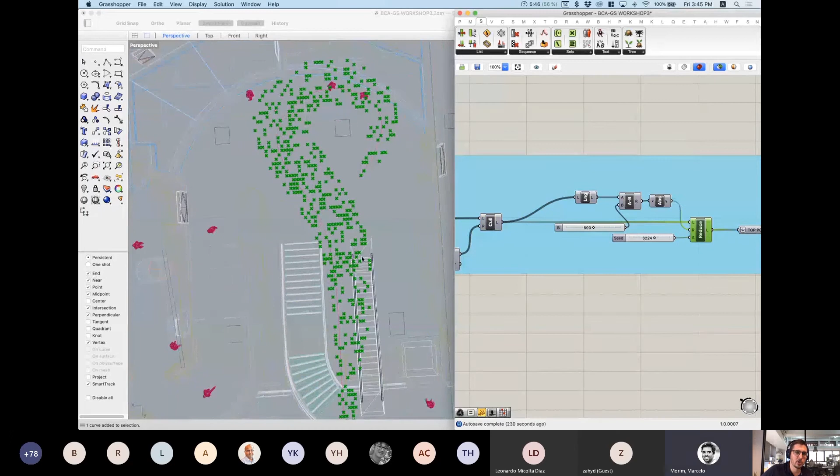These are the ones that I am going to keep, 500 elements. I want to be able to control that quite precisely, because this is going to later on become like a light bulb, or like some sort of valuable piece. So I want to make sure I'm able to quantify and also control the cost for that.

And once I have that, I have my top points. All this part here is important for the fabrication. I'm just going to quickly run through it, but not go in detail.

So now that I have the points on top, I want to project them into the height of the curve. And that sounds easy, but it's not so simple. Why is that? Because if we want to project this, we need to have a surface to project to. And this, honestly, because I'm not very good in Rhino, took me a while to figure out how to do it.

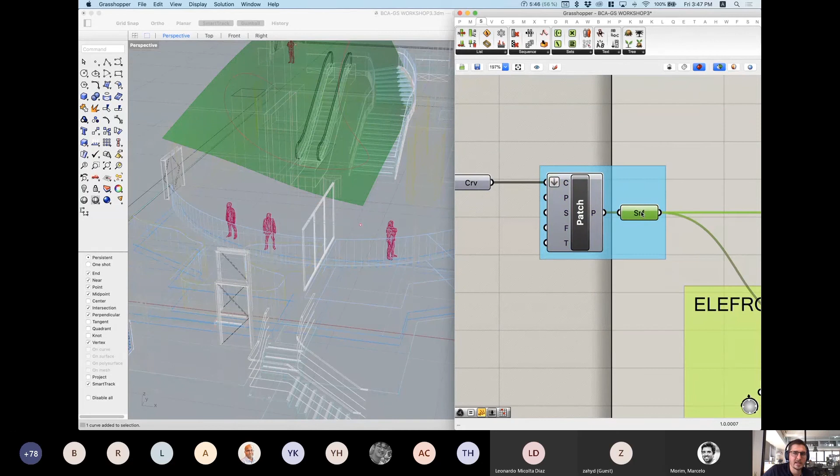So how did I do it? Actually, at the end, quite simple. I have the curve, the original curve, and I just use this patch component, and that patch component is creating a surface that is topologically the same as the curve. So the curve is contained in that surface. If we had more than one curve, this becomes more complicated, but this is very handy - it's a very simple component actually.

And what I'm doing now is, okay, this is the baking system that I told you about.

And what I'm doing now is that surface, okay? I'm just projecting the points. These points I am projecting. So I'm using a component that is called project point. Again, this is under the vector and project point, but you can just type it, okay? Project, and you have all the projections. This one is very straightforward because I have points and I have a surface, so I just need that.

And I need to give a direction. So the software or the component is not gonna know if it needs to go up or down or sideways. It doesn't know, so I need to provide a direction. So what I'm doing is, because I am assuming that these points are the top points, right? They are at the top. So I need to project downwards. So I'm using the vector Z.

So if I type Z here, it will give me the unit Z. This is a vector, one of the standard vectors. And the only thing I'm doing is reversing the vector, so I'm using this reverse component to point the vector down instead of up, okay? Quite simple. I just connect the surface to project into, and I project it, and it looks amazing already.

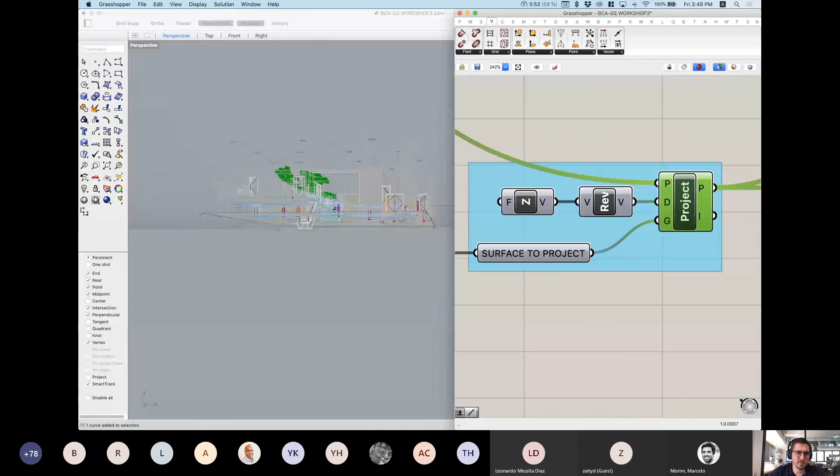Okay, just a couple of concerns. Because the surface was created without a lot of control, and also because the projection is downwards, it might happen, could have happened actually, let me check this, that some of these points, in relationship with the surface, I am not sure, but maybe some of these points will actually need to project upwards instead of downwards. So these points there, they're gonna give me a little error.

They're gonna give me a little error. Actually, you know what, I have 77 errors. So that's why I figured out this after a few rounds of testing. And I have this, so this has 500 components, but you can see that in the bottom of that list, I have a null. Null means an empty or invalid element in the list.

So what I'm doing is just checking the nulls, okay? Like connecting this null item, and this is just giving me the number of items here that I have in this list, 77, okay? I can use this dispatch command. Using this relationship, everything that is true will go to the A list, so 77 values that are invalid, and the rest go to B. So these B are the points that are actually valid for projection, okay?

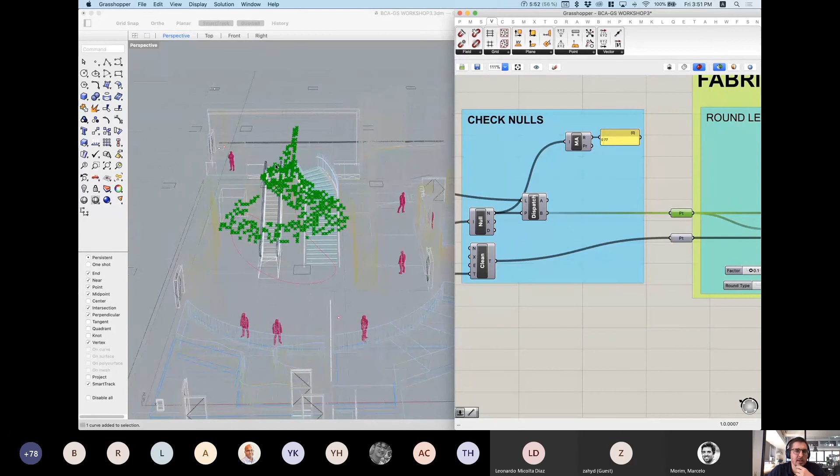And then I'm using, at the same time, I'm cleaning the top points, okay? Because I'm gonna create lines from point A to point B, I need to have the same amount of elements. So I have to clean both lists. I have to clean the projected list, but I have to clean also the top points because I need the same amount of elements, okay? So that's why I'm cleaning both.

I'm dispatching all the errors on one side, and I'm keeping the 423 elements that are valid. And in here, from the project, I'm cleaning, okay? This component is called clean. I'm cleaning every element that is either null, invalid, or empty, okay? So I don't have any of these invalid or empty, but I have 77 nulls.

Anyway, after that, I have two sets of points, okay? The points on the top and the points on the bottom. And what I'm doing now is actually not necessary for the design part, but I thought it could be interesting to share. What I'm doing is measuring the distance between these two sets of points, okay? And that's gonna give me quite a set of odd numbers, okay? You're gonna see here, so I have 3.792454, etc., etc.

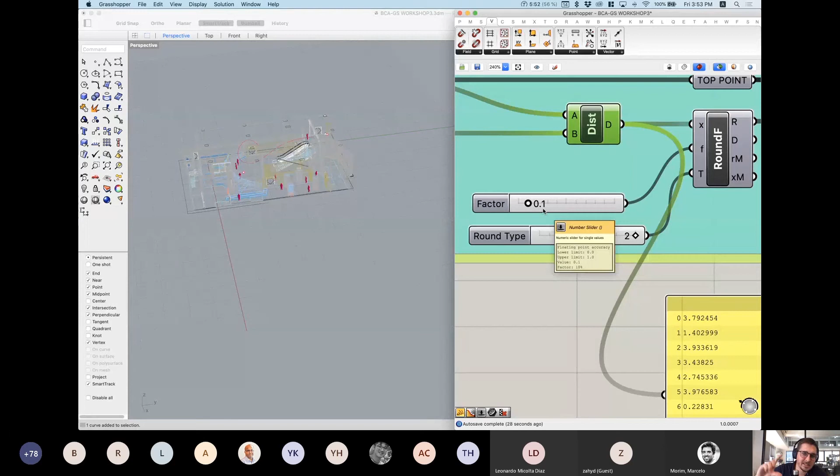So nobody's gonna be able to customize the length of the cable using these measurements, okay? So what I want to do is take this dimension. I want to round them up or down, okay, to a factor. In this case, I want them to be rounded to a factor of 0.1 meters, so every 10 centimeters, okay? And they're gonna be rounded to the ceiling, so to the higher value. So this one will be rounded to 3.8, this will be 1.5 and 4 meters, etc.

So that actually, if you take a look here, okay, oh sorry about this, if I copy this list here and I take this set of numbers, you can see, okay, that this is a much nicer set of numbers to actually give for a construction or a fabricator.

It doesn't make sense, this one. So this was interesting. Anyway, so using this rounding, I corrected the move, so now these points are moved the exact amount, not this one, okay? And I created these lines to connect both sets of points.

The only thing I did here is eliminate points smaller than a certain value. This is more for fabrication, but I decided that everything smaller than 25 centimeters doesn't make sense to have, because they're not going to be visible, or because I don't want them. I can obviously move this threshold as needed, and I'm cleaning that.

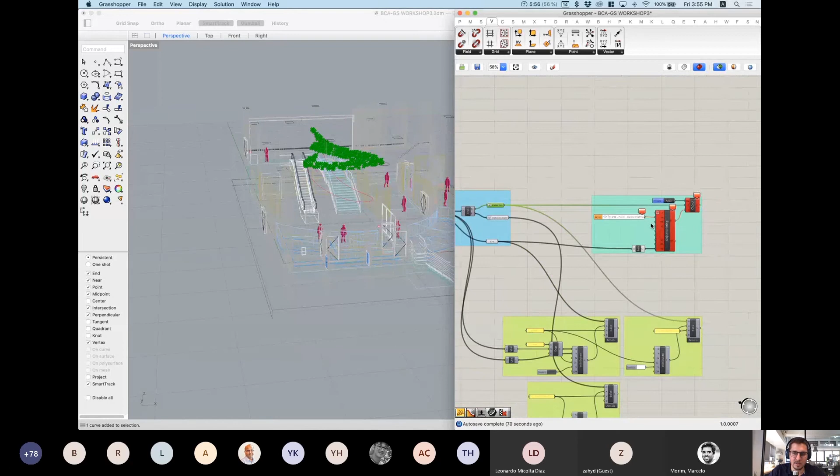I'm just creating the cable, and the cable is giving me two sets of points, and we have ended the script. So at this point, the only thing we need to do is connect this into our object. I'm going to super quickly explain something about our object, and we're going to send it. And that's it, we're done.

So for our object, you can see here I already have the object imported, but the object we use, the object that Carlo created this morning, is this LED light.

I'm just going to place it here so we can see it. Okay, I think, sorry, it's just going down. Anyway, I'm just going to pull it up a little bit.

So the light component is correct, but there's just one thing missing. I want to be able to control this height from Grasshopper. So what's the problem if I want to do that?

I need to connect now Grasshopper, so let's hope for the best. I'll go to Rhino. Now it's lagging a little bit. It's trying to run, trying to connect.

So the fact is that elements coming from Archicad into Grasshopper, you're able to place them, so you can select library elements, but all the GDL parameters are locked.

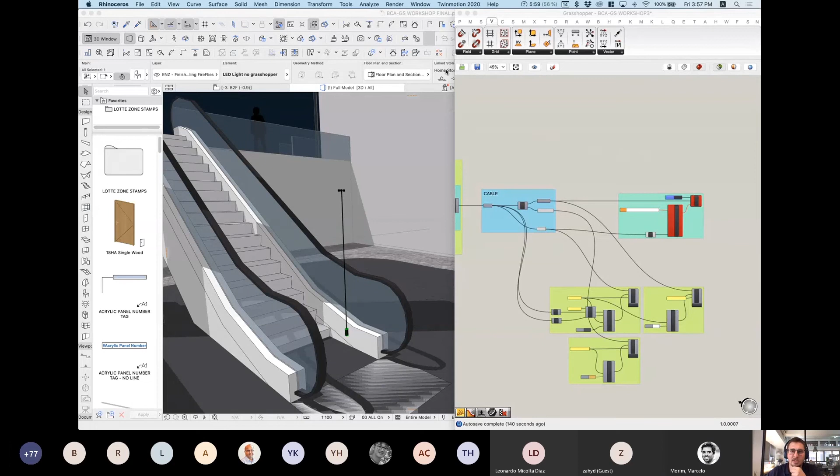Okay, this might be a challenge until it connects. So I'm just going to explain to you inside Archicad. There's one thing you need to know about Grasshopper.

If you want to control this height, this is a parameter that was set in Paramo. If you guys remember from this morning, Carlo created this cable length as one parameter.

So if we open the object, if we go to Element, Libraries and Objects, and open object, made with love with Paramo by Carlo, the parameters are here.

I believe the parameter we want is cable surface, no, cable, maybe it's one of these, bottom level, top level. I think it's one of these variables we want to use as the height of the cable, or perhaps it's this one, height. This height is the height we want to be able to control.

Problem is that on the Grasshopper side, that won't be possible. Let me try again. I think it just got stuck.

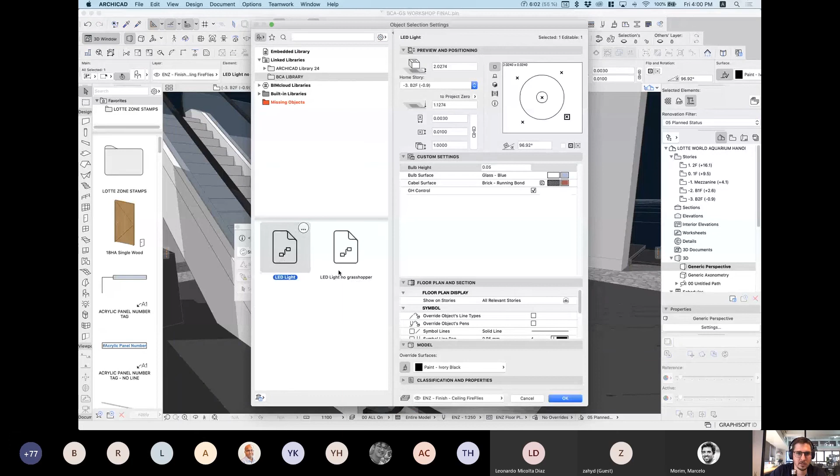So in this one, if I open the object, you can see that I have, sorry, I think I used the same one. I just want to change the object for this one, LED light. Now I can open the object.

You need to add this one parameter here. So how you do that, you just create a new parameter, and then you call it 'param control by Grasshopper.' This is the name of the parameter. Maybe it will give me an error because it exists already. It needs to be a Boolean type.

So a yes or no. And if we want to enable the control of the parameters, we need to keep it on. So this is the key for controlling your parameters from Grasshopper.

I'm going to delete and not save. So by doing this, the elements become... let me see if this helps actually, taking the shadows off, or everything, I don't know. So, sorry about this.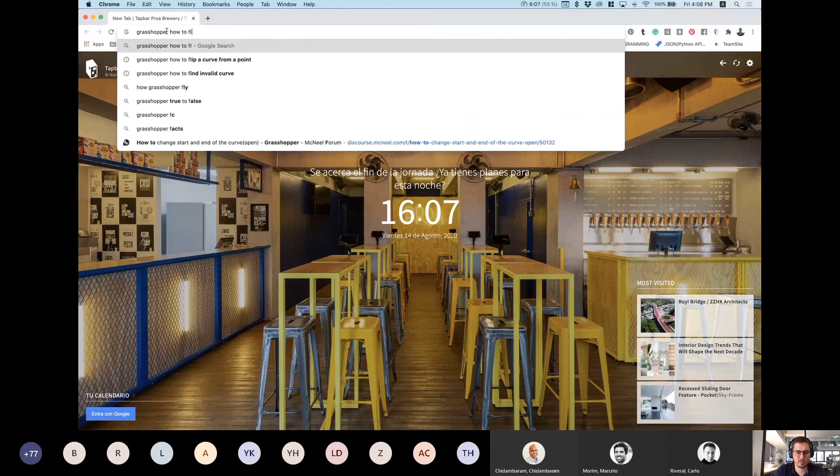I don't know how, but on this Grasshopper 3D forum there are hundreds of different replies. So you can come here and somebody's asking, I have this problem, I don't know how to do this. And you see a lot of people, even this guy David Rutten, the one who developed Grasshopper, the one and only, wrote all of Grasshopper - he's in the forums replying to any loser like me. Amazing. They're giving away scripts as examples, teaching you how to do it. So don't be afraid, this is the forum.

As Marcelo said, just go to YouTube. Maybe if I have time next week, I'll post some of my favorites. You know we have a blog, so somewhere here I have a Grasshopper set of tutorials that I might put on a list. I don't know how to find these guys, but if you search for Grasshopper tutorial, this guy is great - Parametric House or something like that. There are a lot of tutorials, maybe 20 or 30 minutes, 15 minutes, that explain how to do one thing.

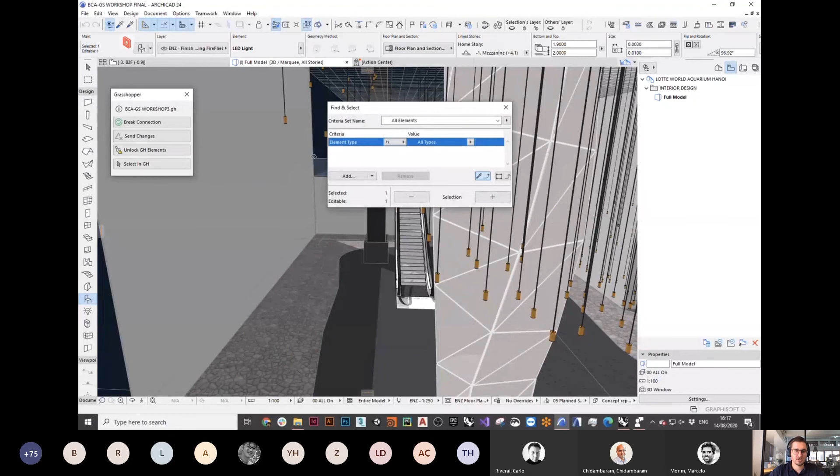Connect first to Grasshopper. I'm going to delete all these elements, okay? Where am I? Control is not command, sorry - yeah, I get it, now you have to change the mindset. Okay, I think I have this saved. I'm just gonna delete all these guys, delete the grids as well, and then let's start from scratch.

So we have the empty space. Seems that it's running, so let's go back here. Everything is here. So maybe I'll just explain briefly what I wanted to show you before. So once you have the object - okay, in Archicad you can have an object, right?

Let me create a new object. You can use an object from the library, or you can create a new object. How do you do that? You just right click here in the black area of the node, and then you can choose. By default, you're going to create a new library part. So anything that you model here in Rhino Grasshopper, you will be able to send it as a library part. But you can also use existing library parts.

What that does is give you access - let's see in here, oh, it's asking me the login name, I think. Okay, so I have some BIM Cloud Libraries here. Anyway, what it will do is allow you to access the Archicad library, and it's gonna scan through your library objects. Okay, and I have here, you see BCA library.

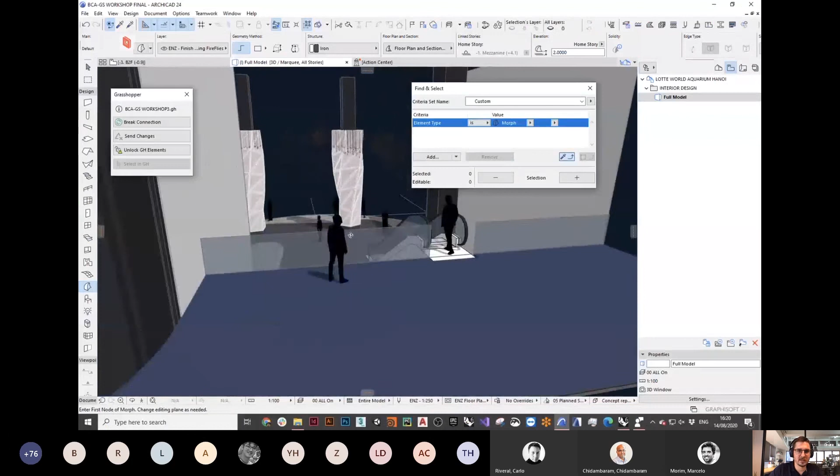Let's send these objects first. So I can just send this first. What is the problem? That I don't have control of the height. So all of them - I'm not sure if they're very visible. I don't think so.

Let me unlock these elements and change the color, change the lights, okay, and I'm just going to color them red or something, so it's easy to see. Okay, cadmium orange. Okay, so you see that all the elements are the same height, and this is not what I want. What I want is to control the height depending on the distance that we set out in respect to the surface. So this is not what I need.

I'm going to just delete all these elements so they don't bother me later. So what I want is to be able to control - okay, I'm going to just disable this. So I want to be able to control the height. And if I go here into the select Archicad library, this is the one that I'm using.

You see that all these now are available, I can just click here. I could just click here and here to enable these elements into the node. If I click OK, see that these elements here, they will be available. I can just select as many as I need. I don't need these guys here, I don't want to mess with them. I just need the height.

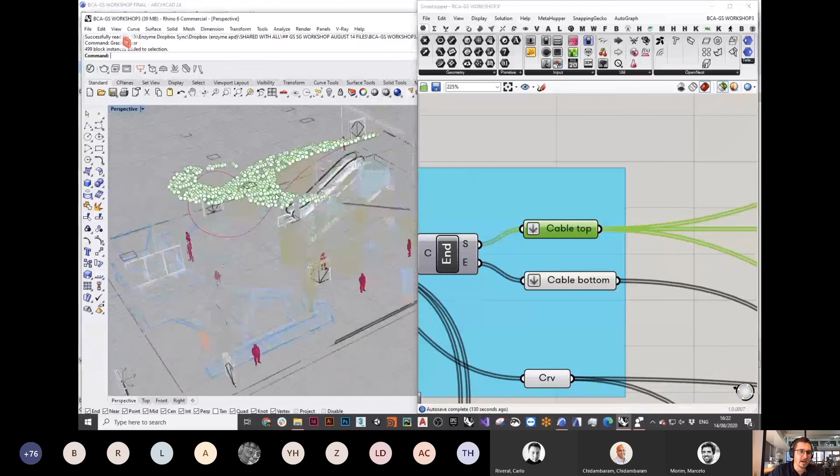Okay, and then I need to give an anchor point, and this is important because every object has an anchor point, and this anchor point will be the top. This really depends on how you model your elements. So I'm just going to click on true, and I'm going to send these elements.

If I go to Archicad, this is exactly what I need. Let me just, again, override this for like a yellow or something more visible. And this is exactly what I needed. So all these are coming to the right place.

The only problem with these elements at this point, and by doing this I'm introducing the next exercise, is that I have no control whatsoever about the ID, the name. I have no idea how these are. You see, they're all called Object 7. I don't know how these are named, or how I'm going to be able to schedule them properly.

So I have two options. One is the one that I did before: create a logic here that can easily duplicate the size of this script in order to make a parametric logic to name and label, and that's actually very interesting.

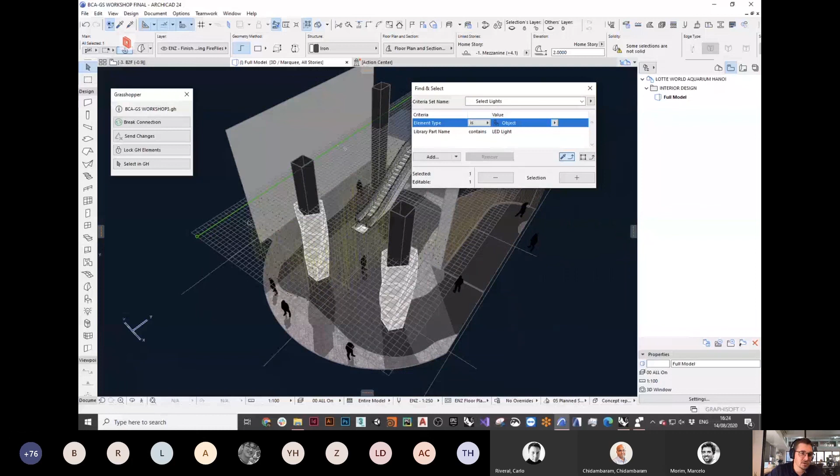The other thing I can do is send these grids, these morphs. You see, now these are super quick to send, and because now we have access to Python scripts in Archicad, we can use these elements to control the ID, naming, and some properties of this element. So instead of creating a very complex logic in Grasshopper, which might come in handy in other instances, what we're going to do is use Python for automating the labeling and naming system. Okay, I think I'm done.

Sorry about this interruption. But I think it's okay, at least we get a closure to it. Okay, so I'm going to give back to Carlo. Okay, I don't know how to... let me just, I think you will just request to share the screen, and then you will be kicked out.

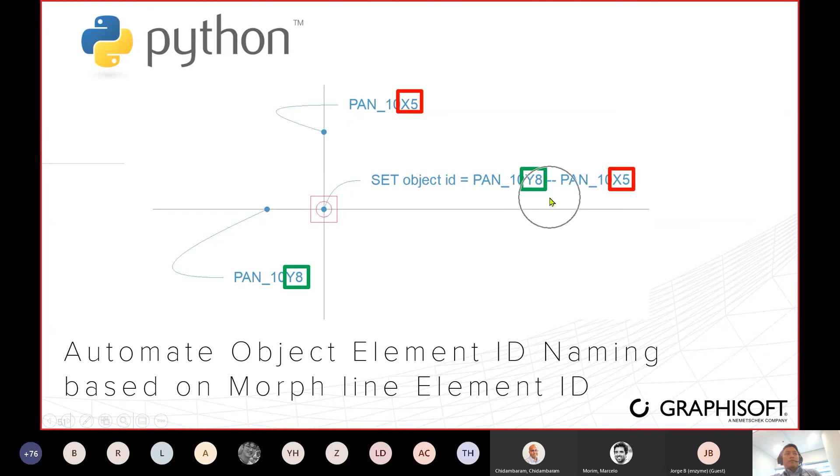Okay, so this is the plan. I hope it works. The first plan is to get the bounding box. Just to give you a quick schooling about elements: everything in BIM, every element, has a bounding box. Take note of that. So this is the plan now. We're going to get all the bounding boxes, including the object.

This is some of the API docs functions. Later I will flash the code, these are just snippets. So that's the plan: get the bounding box of the object, get the bounding box of the morph x, and then get the bounding box of the morph y.

So to explain it to you, in Archicad API Python, every object has a bounding box. This portion we call x min, and the other side is x max. This is like a coordinate system of the object's bounding box. And here, this is y min and this is y max. About the object, let's pretend this is the object light, the pendant light. Then the next step would be getting the morph bounding box.

Let's start with this vertical one. Just a quick info: if we have a line, this is y min and this is y max. But of course we still have x min equals x max because this is still x, but we don't have height, right? We don't have max. So we still have the x because there's no displacement.

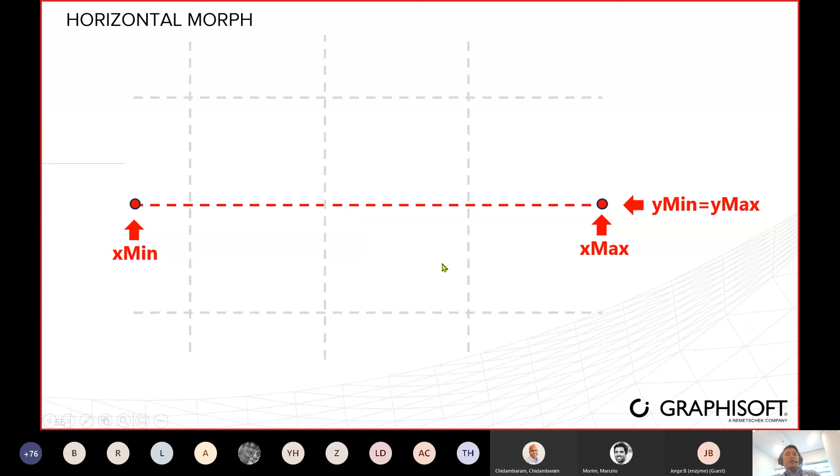Okay, this is the code. So this is the first plan. We need to segregate the morph, then name based on the configuration. I'll show you the configuration later. So these are local variables. Okay, so this is the plan.

So we need to segregate where is the vertical and where is the horizontal. I'm not going to teach you how to write Python, but I'll explain how this one works. We created a loop and condition so that we can segregate the y and the x.

Once we segregated the y and the x, which is the horizontal morph and the vertical morph, now we have the opportunity to set the ID for horizontal. We have the y min and y max, if you still remember. So now what we're going to do is get only the horizontal morph line, and then set the ID. That's what we did here.

After that, again, get the vertical morph because we successfully segregated them, and now I could create a list and create a condition to set the ID. So that is the first step I need to do. So now once I have this...

...two morph lines, which is the y and x, this is the tricky part. We struggled a lot here because we don't have geometry intersect in Python for now. So this is the struggle we're facing, me and Ralph, trying to find a way to ask Python to detect where is the object. So this is what we came up with.

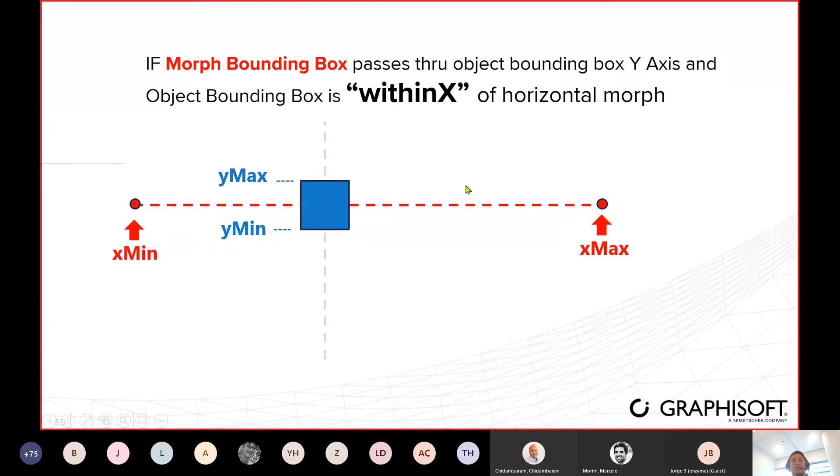This object is qualified for naming, but we still need another one. We only have x - we still need to get the y to verify the location. So again, we created another condition. Now this time is to check if the bounding box passes through the object box x - again, object is the blue one, and box x-axis is this one, this line - and the object box is within y, so within this line. Now I successfully locate the location of the object.

So now I have two conditions - one here which is true, then another condition here which is true. So now we successfully verify the location, and this object is qualified now for ID. So this is the simplest way to explain this automation part.

So now the next part would be get original element ID of the object and its corresponding horizontal and vertical morph. We did some string manipulation here for the X coord and Y coord. Then we create an if condition to set the new element ID based on the morph line. So that's a very simple explanation on how we manage to locate the ID and name it.

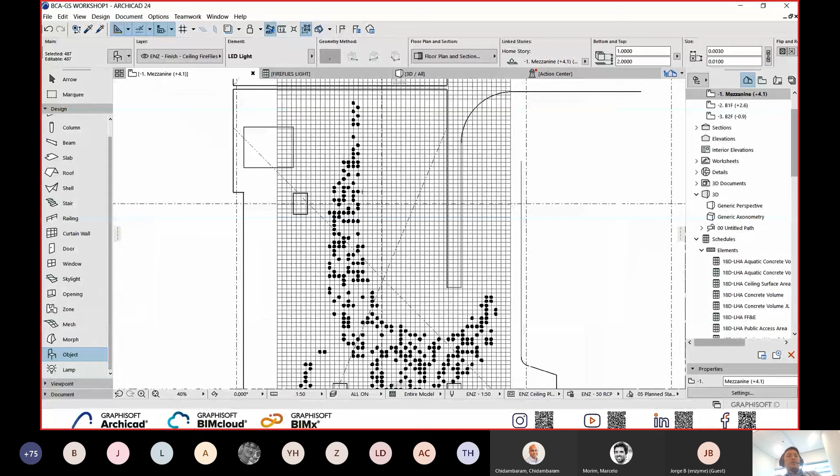Let me do some verification. So I will select all the objects and automatically label all. We have this tool in Archicad to label everything in one shot, because I need to check and verify all the IDs. Let's zoom in a little bit, and now you see no ID. This is the problem now I'm facing.

So with this Python, it helps me automate this process. So we have two problems: the morph line doesn't have ID and the object doesn't have ID.

So go to work environment. Make sure you enable Python palettes. Click OK. Then go to Window, open your palette, and then click the Python palettes.

So now Archicad will search for the python.exe. Now I have the palettes here. Of course, if you want to load and locate your Python, just click this folder. If you want to delete and refresh, it's here.

Again, the Python is created not inside Archicad. You need to use other IDE like Visual Studio Code or Jupyter Notebook, so it's up to you. Then you just need to run here, okay? This is just checking the connection. You see the python.exe location is here. Okay, so that's it.

Then now it's time for the magic. Let's run this script and see if this one will work. Refresh and see the console is showing. So now Python is running and trying to automate the whole process.

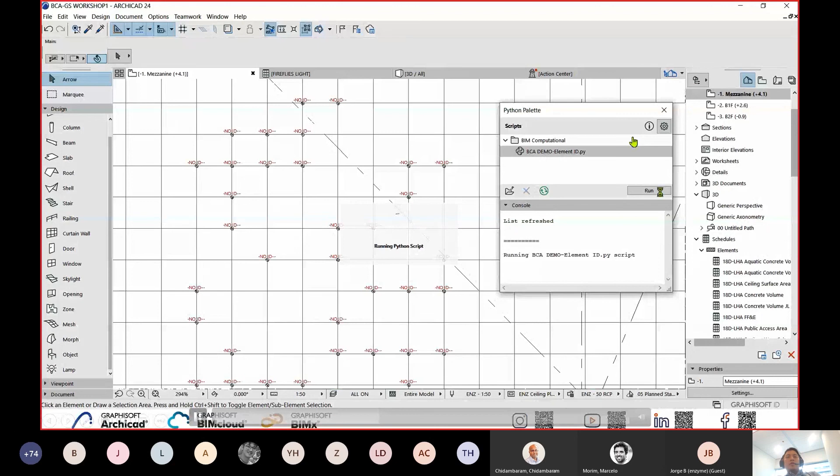We have two passes. One pass would be the morph naming, second pass would be the object naming. So now we have successfully renamed it based on the coordinates. You notice we have this object name, that is the object name now, and on your right you will see morph, right? That's the ID of the morph. We have pan x something, so the other side is y13. So we had successfully automated the process.

Okay, the naming process. Let's verify and see if everything is okay. Wow, this is great stuff. Yeah, but we burned like half of our brain cells to do this.

To figure this out, luckily we have Chidam and Ralph here to help me. So yeah, this is the process. Then I will show you the code, but of course I'm not gonna teach you how to write Python, I'm just gonna go through it with you in general.

Let's try to modify the code a little bit and change something. Let me open up the code. Before we open up the code, let's check the schedule first and make sure the ID is properly assigned. So this is all the objects, element ID, everything is okay. Then you have the length of the cables and the name. Yeah, okay, so that is how it works. Now let's try to open up the code and do some configuration.

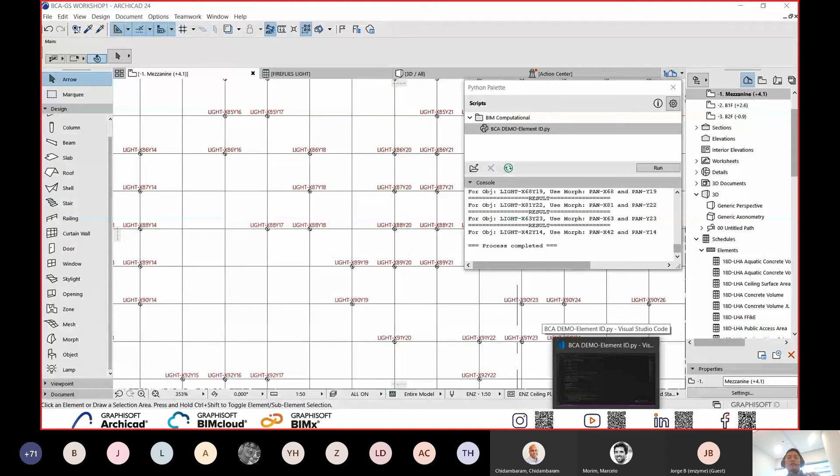So we have this configuration here, these are local variables. If you want to rename, for example, the name of the object, then I will just save it. We do have some debugging here using print, just like Ralph mentioned, but I will not turn that on. This is the position of the coordinates, if you want to start from top to bottom, or the other way around. That is x and y.

Yeah, so this is the whole code. Not gonna explain it all, but just splashing it on the screen for you to check. It's a bit complicated because there's a lot of conditions we need to meet. Okay, so yeah, let's save it.

Then go to your Archicad again, and search for this file. I'm using the same file in the folder, so I just need to refresh this. Click refresh and make sure you see this refresh console, and then click run.

So instead of light, now we should say thank you. Thank you to BCA and everyone. Yeah, I hope it works, but it's still loading. It takes a while, but thank you. There you go, great job. Thank you, Carlo, it's a fantastic job.